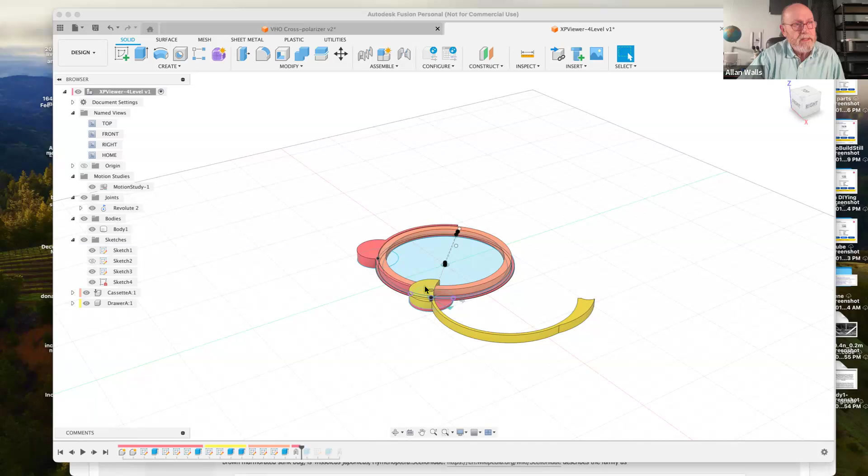This is the latest iteration of the 3D polarizing, cross-polarizing platform that I built. I've made many of these things now, but this is the one I think I'm going to go with. This is one level of four. There's also a lighting level below this and a cap on top, but this is the important part. What did I call this? The drawer. It's got a shell or a base and a drawer, and then a cassette that goes on the inside, and all the parts are different colors so you can see where the different components are.

This piece swings out, supposedly with the cassette attached, so that you can drop in your different polarizing films or your subject, and each cassette is different, but the structure is otherwise the same. When you drop this back in, you close this. This is a joint right here, and there's a window in the side of this piece, though you can't see it because for some reason it didn't transmit over, but there's a window that your fingertip can use to rotate the cassette.

Now I've made a couple of these in different ways, and they all got messed up trying to copy this and make new layers that could be edited independently, and that's what I'm asking Larry about today. Though if it's not part of what he wants to talk about, we'll do this offline. But I'm trying to figure out how to make copies of this that are independent. There's an instruction you can give it, which is paste as new, but it doesn't show up when I copy the level. It doesn't show up as an option to paste it. So that's one of the things I want to pick Larry's brain on.

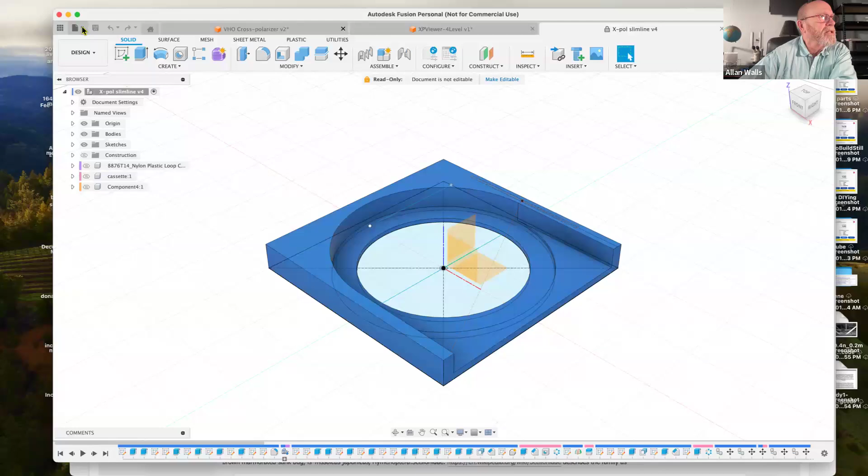Now, what was it called? The cross polarizer. See, I've got quite a few of them. I think I called it the XPL. No, this was the one. Nope. Oh well, if you don't remember what you called the thing, it's hard to find it. I kept changing the name because I ran out of things to call it, I have so many of them. Oh, I'll look at the date. Good idea, there it is. Oh no, that's the one I'm working on now. I'm very good at this, aren't I? It's 7/16, nope, wrong year. Can't believe I've been doing this more than a year. VHO. There.

So this is what, with all the components in different colors, this is what the stack would look like with all four drawers, four chassis, and four cassettes. But while I could get all of these like this, I couldn't operate the joints independently, and I couldn't edit the cassettes independently. I edit one and it edits all of them. So that's what I wanted to bring up if we get a chance today. But just as an update, that's where I am. This looks more complicated than it is, but...

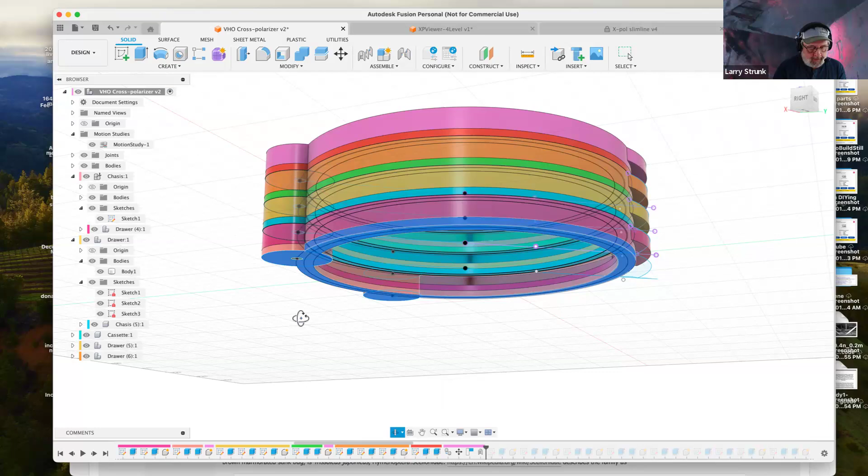But after I say this, the thing sits like an alarm clock on these two cylinders, and then it has 4 little handles for each of the doors. Larry, I was just filling time, showing folks what I'm messed up with right now, and I'll turn it over to you, Mr. Tangent.

Can you email me that file? Yeah, I just messaged it to you, but I'll email it. I'm not able to download it. Okay, this is not the one that I sent you. The one I sent you is the one I'm actually working on now, which is simplified to just one level so it wouldn't be as confusing. I'll show it to you, then send it to you.

Hang on, there's probably a way you can list these in order, isn't there? Is this the one I'm showing now? No, that's the one I've got now. It's, there it is. This is the one I'm currently working on. It's just one level, and the problem is how do you copy it with the working joint so you can edit it. All three components are the device so far. I will email this to you, and I will stop sharing and turn it over to your good hands, sir.

Sorry, I had a bit of a it was our park picnic today, so I had to get my lunch, and it took a little longer than I planned.

Windowed projector in preview, it's pretty fuzzy. Is it? Yeah, pretty low. Does that help? Yep, that helped a lot. Now I got to figure out why you can see Lightroom.

It's actually not Lightroom, it's showing Fast Raw Viewer. Is that an add-on, a Lightroom add-on? Hang on a second, no, that's a different app. I was going to show that when I talked about my... are you in there, OBS? There we go, there we go. Jeez, oh Pete's, man. Has anybody used Fast Raw Viewer? I have not. It's a little $30 program. That's why I haven't used it.

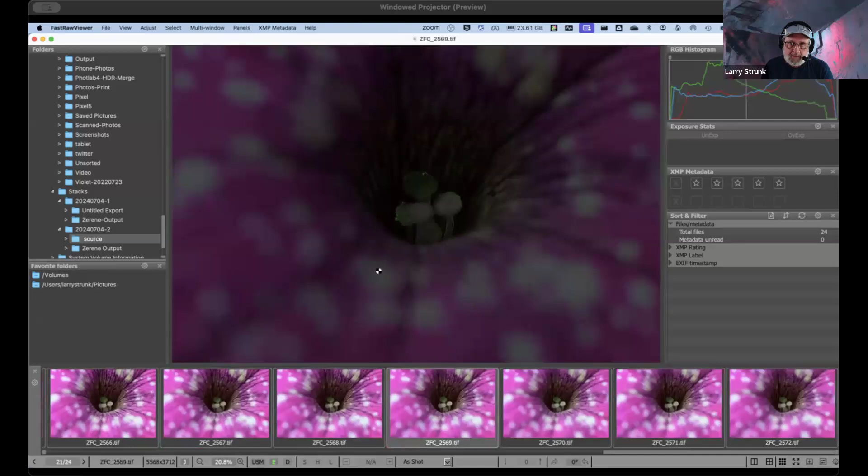The reason I use it is because it's a fast file viewer, but you can do this thing where, can you see the green highlighting in here? No, it went dark. Right, and there's little green highlights, like almost like focus peaking. And you can go... oh, I see it. Now yeah, yeah, now I see it. And that's how fast it is, even with a raw file. So if I'm wanting to do a stack that's only part of an image, I can use this to find my stacking zone and decide which images to stack. You can do other cool stuff with it, but it's kind of my main culling app. What's it called? Fast Raw Viewer.

All right, let's get Fusion up. We're on a Mac today, Larry. Come on. I was hitting the Windows key and nothing was working.

So my plan, since I figured nobody was going to get their homework done with Allan being gone for 2 weeks, was to do a little lesson on how to draw things from images that you find.

Larry, could I ask on the homework? I did scan my camera body. My plan was to scan each piece rather than try and support it all in one go. When I scanned the camera body, the depth of field wasn't great - whichever side was sitting on the glass. Do I have to play a bit more in the scanning settings to get something with depth? Because I take it we need the depth of the image.

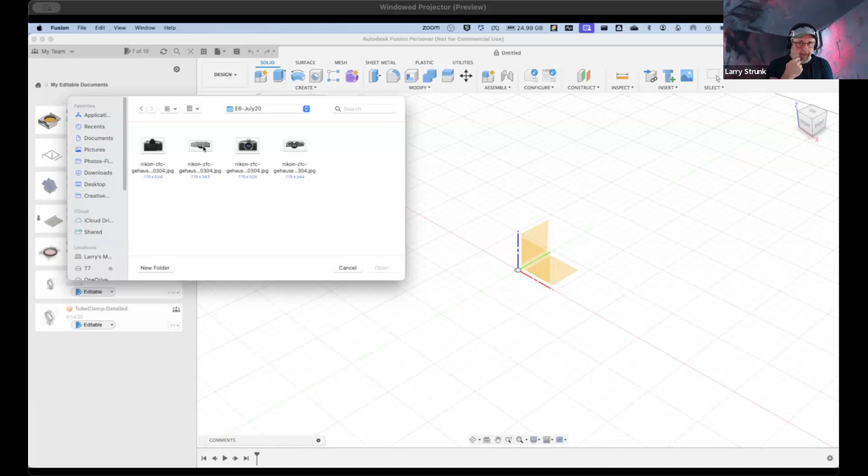So I'm going to insert a canvas. And I have them here. I don't remember which one is which - oh, I can change icons. Decal is just a zero mass shell, or it's just the outside, it's hollow. When you choose decal instead of canvas, is that just the shell? It's not even a shell, it's almost like paint. It would cover up a material. Right, it's a sticker. I mean, it's a decal. It's a sticker. Got it.

So I have, maybe I can show you the pictures. Documents. So I was able to find, because of all the review sites that are out there, these JPEGs of my macro camera. Not the macro camera I would have chosen, but it's mirrorless, and macro with mirrorless is way better than with a DSLR.

Can I ask your opinion on what you just said? Sure, what's the difference? Partially it's because live view is very clunky, at least on my D500. It sounds like it's going to fall apart every time you take a picture - it goes ka-chunk, ka-chunk, ka-chunk, and it's just not very good. If you have a Canon or some other DSLR, the live view might work better. But live view just lets you use mirror lockup - I don't know if you can with live view, Allan might know. The situation for me was, until I had a mirrorless camera, I couldn't understand what all the fuss was about. The mirrored camera worked fine using mirror lockup.

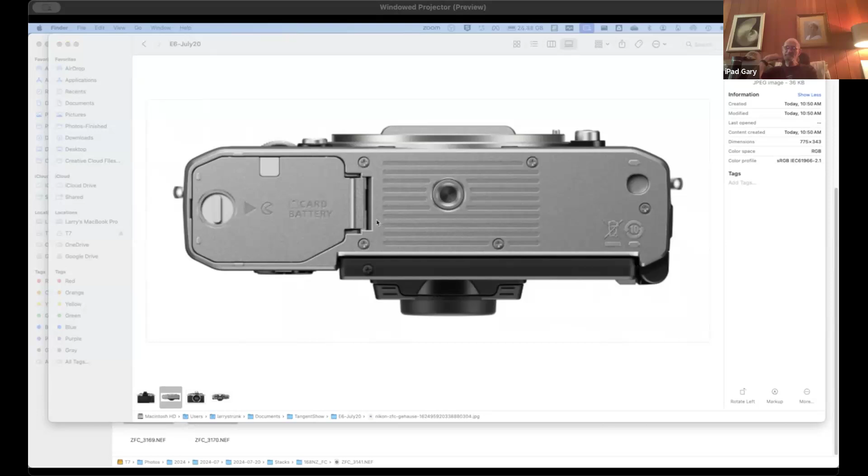Sorry, Larry. Larry, glad you answered. Are we losing him? Yeah, Larry appears to be frozen. But I love these pictures of his camera. That is, yeah. I would love to find where he got those from.

You back, Larry? Yep, I'm back. Can you hear me? Yep. Okay, so I started with this one because everything you reference on your camera and your cage is going to be based on the tripod socket, right? Forgot to hit a button.

So the first thing we want to do, you'll see in the tree, we have canvases. I'm going to go ahead and edit the canvas, and the nice thing about when you're doing what I call volumetric models, you don't have to be exact, right? Larry, if you're close, your map on the top right references this as the top. Is that just because it's the first picture you chose? Can you check? Can that be changed?

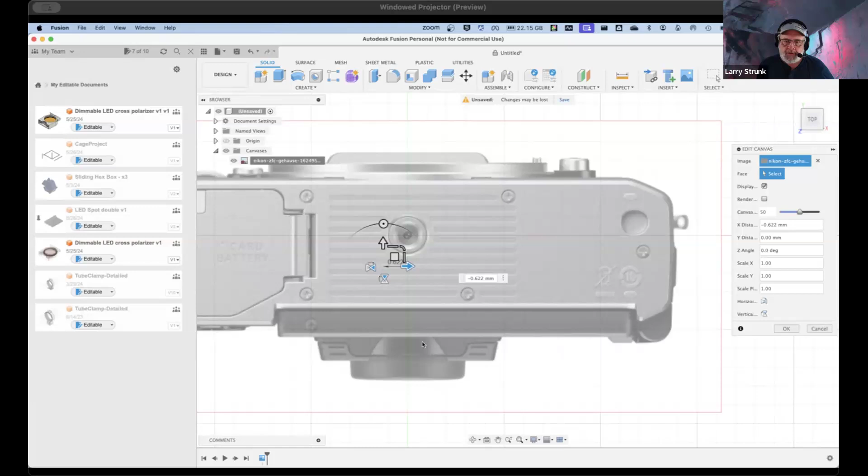So when you put a canvas in, it's see-through. It works on both sides. Okay, got it. I chose the top plane. It does flip, so the viewfinder, which is on the bottom here when I'm looking at the top, and if I'm looking at the back, now the viewfinder's on the top of the screen. Understood.

So now that I've got it where I want, I could either measure a known object that I can easily click inside this image, or I can simply do some more digging on the internet, and I can see that it's 135 millimeters from the edge of the lug to the edge of the lug, probably.

And that's probably going to be close enough. So I right click on the image. Whoops, I moved it, so I gotta click OK. I right click on my canvas, I click calibrate. I'm just gonna eyeball the edge of that strap lug and the edge of that strap lug.

Does the calibration become more accurate with the more data points you enter, or you just stick with one? No, you just have one measurement. But you can see this is on an angle, so if you have that kind of situation, I'm just gonna hit escape. It would be logical to take the biggest measurements, and then that would mean the accuracy of the other ones would be better. Correct. Very good point, Graham.

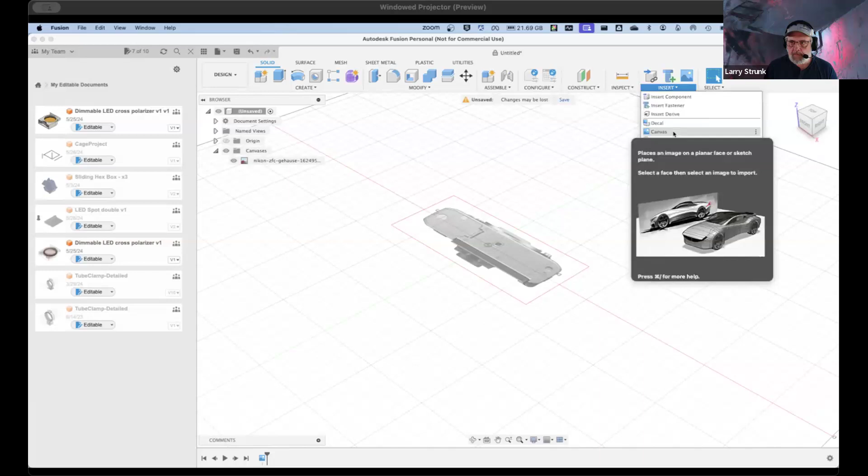And now I'm going to insert another one. And let's do... so what is important here is that you have your plane of where you want to sketch be roughly where you want it to be. So before I insert this next canvas, I'm gonna go into my top view. I could go into, it doesn't really matter where the view is, but I'm going to construct an offset plane. And I'm going to put it right to there.

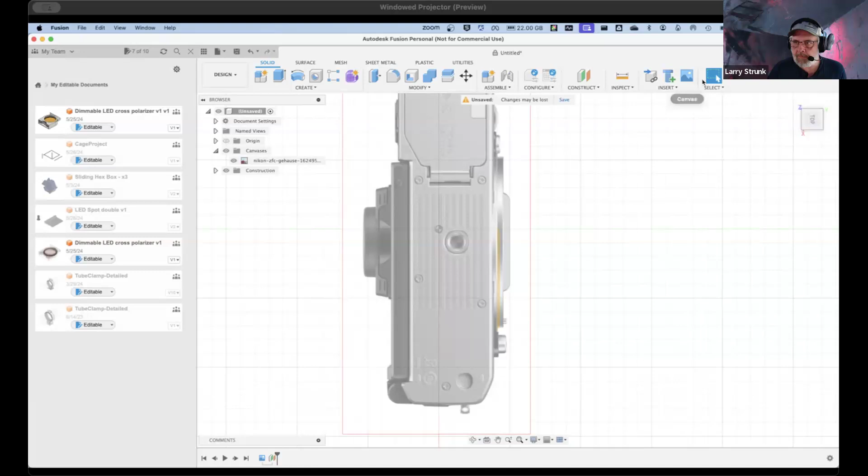Go back to my isometric view. What's the purpose of the offset plane? That's where I'm going to put my next canvas, which is going to be the front of the camera.

Why would you not just use the same origin point? Because I'm going to want to extrude one of these sketches, and I could extrude it two directions, I guess. Six of one, half dozen of the other.

So do you want a separate image for every face or surface that has a unique feature on it? I'm just gonna do two for this one. Every feature that you would want to model, yes. I'm really just gonna go for a cube, a rectangular cuboid, just whatever shape. But I'm gonna make sure I have the lens as good as I can, and the tripod socket - those are the key dimensions, right?

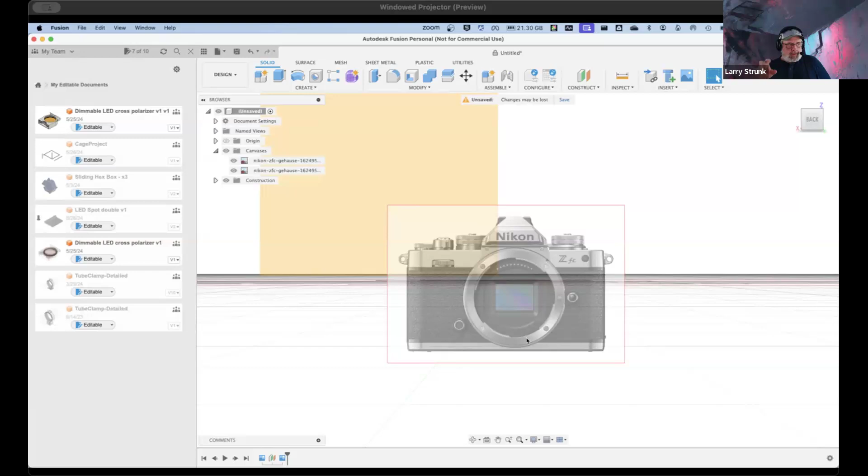So I need to edit this one. I can rename this, which is always a good idea to rename things.

This one's kind of tricky because you gotta adjust your view until the plane disappears, and then you can slide it up there. Is there no sort of referencing that first image to be able to punch numbers in? Nope, there's not. It's kind of a fiddly thing, but once you get it done, it's kind of nice.

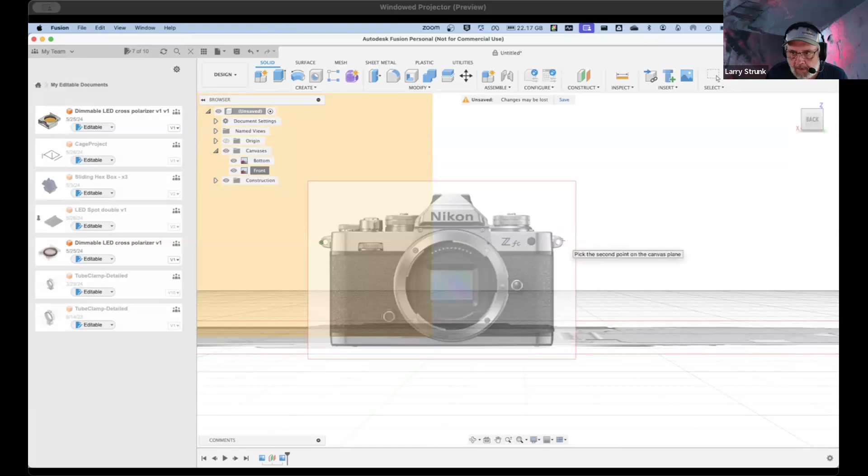So we can do that same calibrate now from here. Is it important to you to use the same dimension here? I could have, if I measured the outside diameter of the lens mount, I could have used that. I'm just doing that because I have the number up on my other screen. So I put in 135.

And now I probably, or I may anyways, have to - oh, actually looks like it lines up pretty good. I was going to say that looks close. Thank you, whoever took those photos. That's pretty amazing.

So then go ahead. I was going to say they obviously bothered when they took them, didn't they? Yeah.

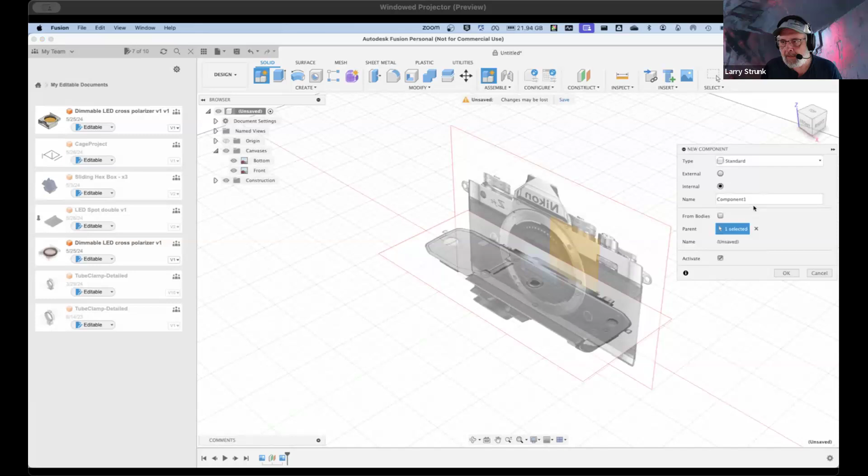And then it's just a matter of - I'm going to come in and create a new component, and we're going to call this ZFC volume. I'm naming it with volume so I know not to measure anything off it, because it's not completely accurate.

And then we're going to create a sketch, and we're going to do that same plane. It's grayed out like that because I did the canvases outside of the component for some reason, because I forgot to create the component.

But then it's just a matter of - and you can get as fancy as you want with this. These are just lines in sketch.

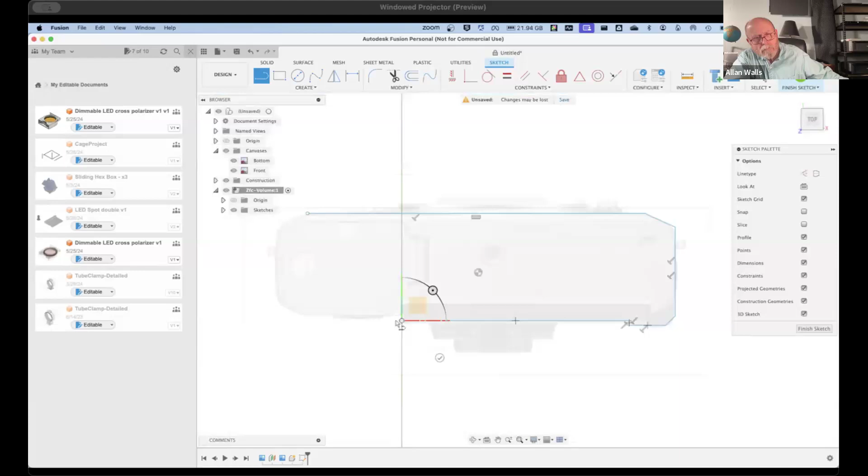And again, the idea isn't to be completely accurate, because it's not going to print. We're not printing it, are we, Larry? Right, exactly - ultimately you just want sort of a length and width to fit the rest of what is going to be printed around it. You're even printing something to hold this thing - you're not going to build a case for this camera. Nope, you just want something that shows the space that it takes up inside your rig.

So I'm going to finish that sketch. It was just a placeholder. I was going to say we're not going to fit the rig to a thousandth of an inch or something, are we? Right, exactly.

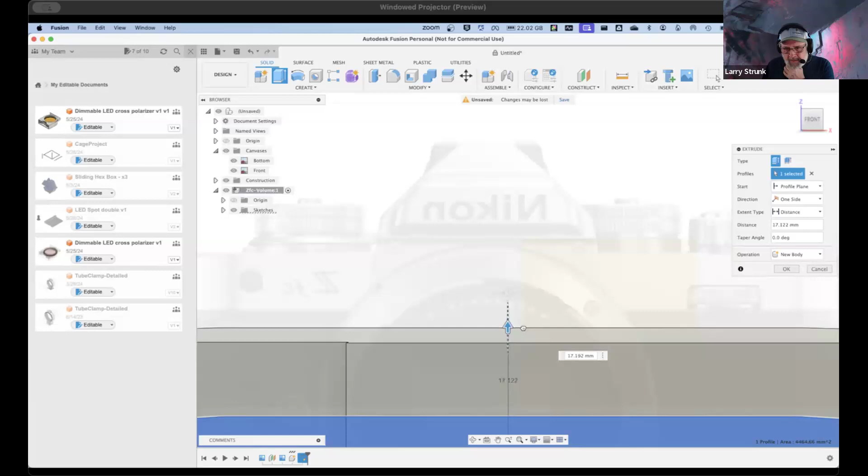So I'm going to go to front, and maybe I'm going to get fancy and do the mirror - but that looks complicated to me, so I'm not really gonna do the prism. I'm just gonna do enough to make it look decent.

And this is where, you know, if I wanted to model all of those dials - see what happened there? I didn't, for some reason - when I calibrated, my vertical move got off.

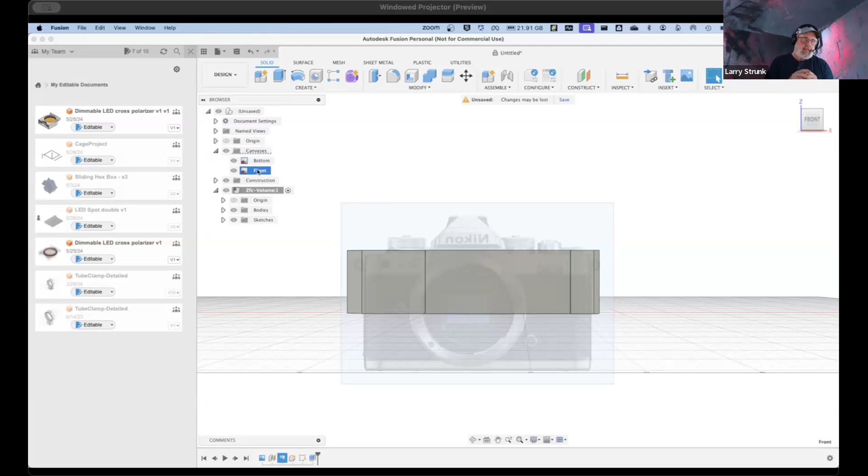Is it on the top reference plane of the camera now? No, what happened was when I scaled it, when I calibrated the canvas, it's like a scaling of the image about wherever I clicked for the calibration measurement. So that distance was X number of millimeters from the origin, and it referenced that from the origin and scaled it, right? So pretty easy - I can just edit the canvas, eyeball it again.

Why would you not use the optical axis as your key feature for calibrating? Well, I have two features for calibrating. The optical axis wouldn't be a calibration, but I definitely want my optical axis to be relatively accurate. Again, we don't need millimeter accuracy. We want the reference points to be where you're going to mount things, like the tripod socket and a plate, and you want the lens, the circle of that lens mount, so you can model a lens. Got it.

So I'm going to press and pull this to get it where I want it. I'm just going to go up to there.

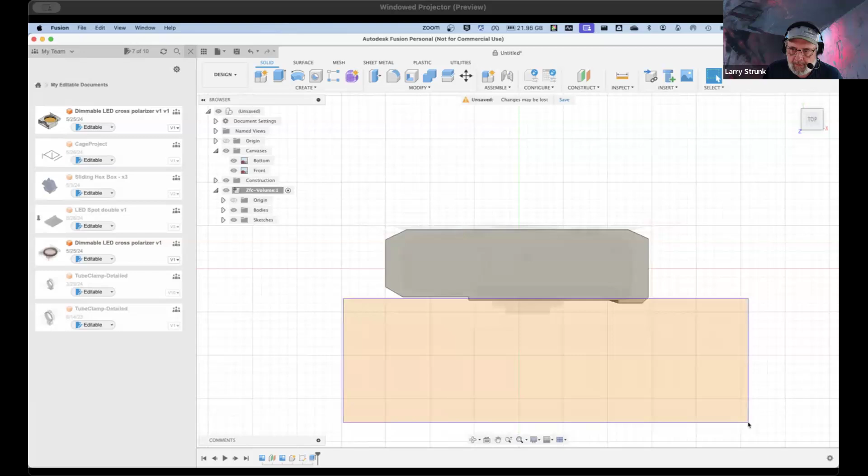This is where you've got to be a little careful. See what's going on here? My viewfinder and my bottom are in this area, and my lens mount is up here. But this is asymmetric, right? It's not centered. It looks like the body's backwards. Isn't the bit on the right where your left hand goes?

No, this is the right side looking at the viewfinder. Oh, okay, alright. Then I am backwards, okay. This really should be... No, we're not looking through the back of the front face image, are we? Because the Nikon would read properly if that was the case, wouldn't it? Right, Larry, when you picked the second plane for the second image, I think you had the wrong plane, didn't you?

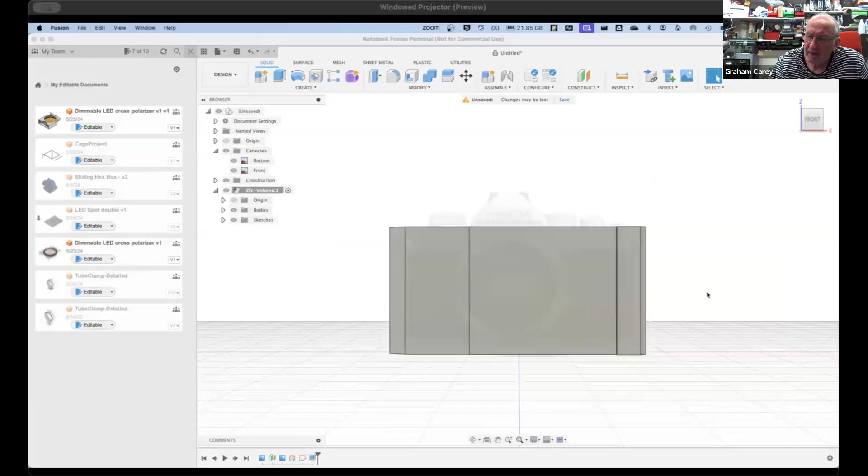I may have. Let me fix it this way. I'm gonna edit the canvas and horizontally flip it. Now it's correct. No, it's not. Jeez. That's right, easy to get lost when you're doing this.

So what's going on is the canvas, we were looking at it like this, right? Did it say Nikon correctly before, or was it backwards? It was backwards before, but it's right now. It's right now, yeah.

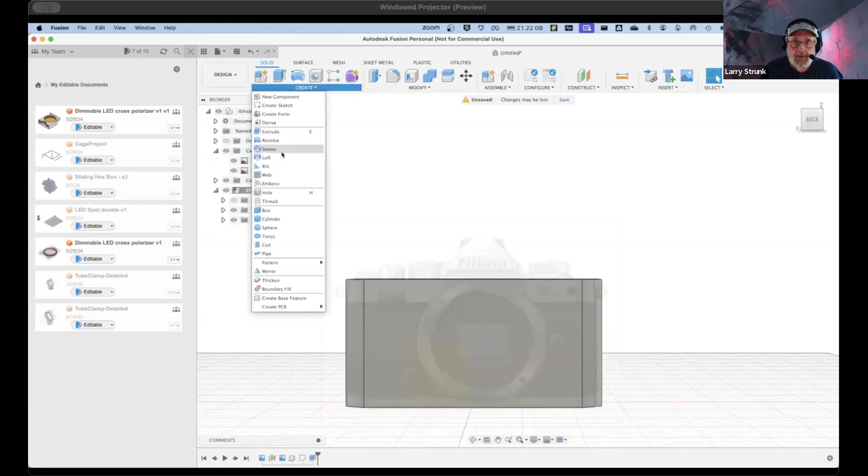So I can create a new sketch, and I'm just going to start on the front of this object, because again I'm not trying to be perfect with it. Not sure why it was doing that. There's a tip for you: if a tool is acting funny, just get out of the command. Now in this one, I'm gonna... we'll go there. It's gonna be close enough for what I want to do.

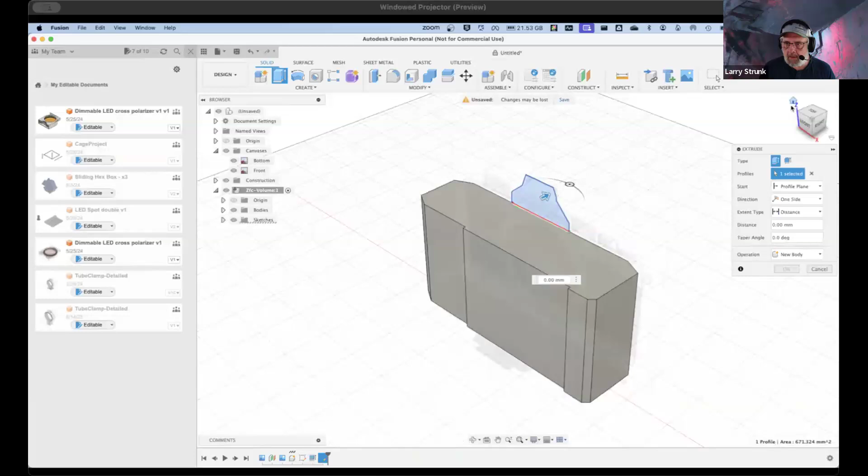We'll finish the sketch, extrude it, and we're going to come this way. I do want to get that it comes out. So now we've got that. And then the trick with approximating circles is...

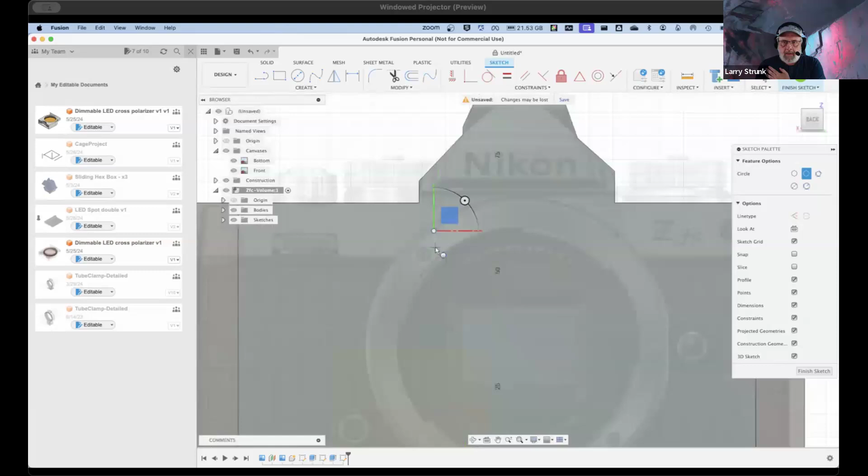We're going to create a new sketch on that front face again. I'm going to do a circle, and I'm going to use a 3-point circle. Whenever you're digitizing an image, you have to kind of play with how close you're zoomed in. If I zoom in too close, it starts getting fuzzy. So you're gonna kind of get it right to the spot where you're confident you're selecting on a line, and then make sure you're selecting the same reference circle.

And that's respecting the resolution of the image you've picked up, isn't it, Larry? Correct, yeah, and it's totally dependent on that resolution. So that looks pretty good, and you can kind of test.

What the heck? Oh. Let's turn our body off. You can check that. Why? Oh, now I can select it. Jeez.

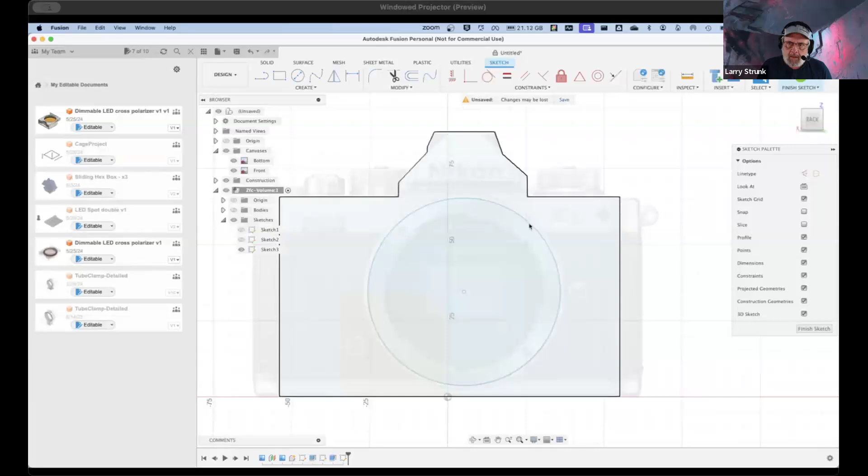I don't understand why I can't offset that. I think it's because your sketch is on a different plane, your sketch is on the plane of the back of the prism. No, my sketch should be... let's bring the body back on. It's in the right spot. Yeah, it is. Sorry. That's all right. So we can do that another way.

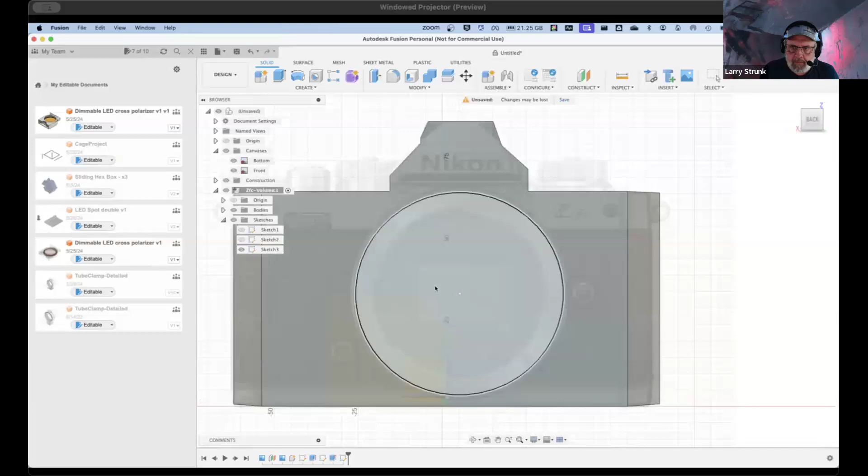What I was going to say is you could offset the circle, but for some reason I can't seem to offset the circle. Could you project that circle up onto wherever you are now? You could. Boy, it's not snapping or anything. Now I can. So create a circle. Oh, jeez.

So instead of doing an offset, I'll just draw another circle and use the center of the circle I already have. Just by rubber banding it like this, I can see whether or not my center is good. Just by eyeballing it, looks like I nailed it, right? See, I can see the edge.

And then we can extrude. Turn the body off. Why?

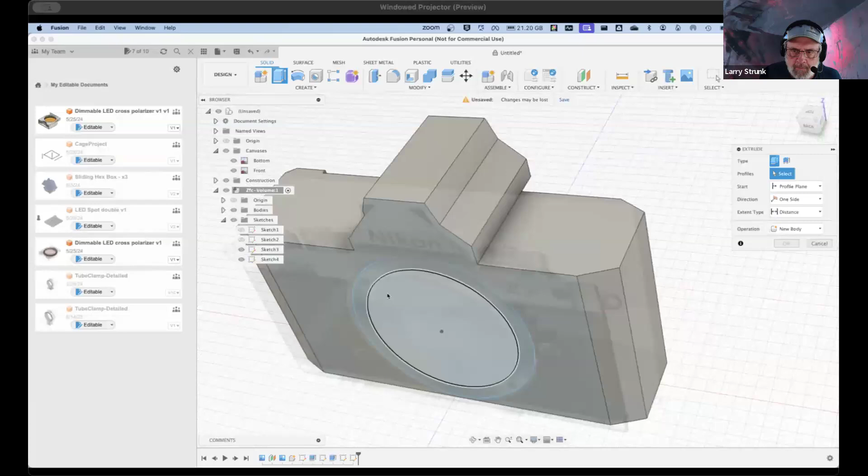My Fusion is acting really strange. Is it because you're pushing it with what we're doing? I don't think so. I think it's because I have an update that I'm supposed to be installing. Oh yeah, so it's sulking.

Maybe. So the other thing I wanted to show was, you know, I have all one body right now, and that may or may not be what I want. You can always go back and edit the feature and change it to new body.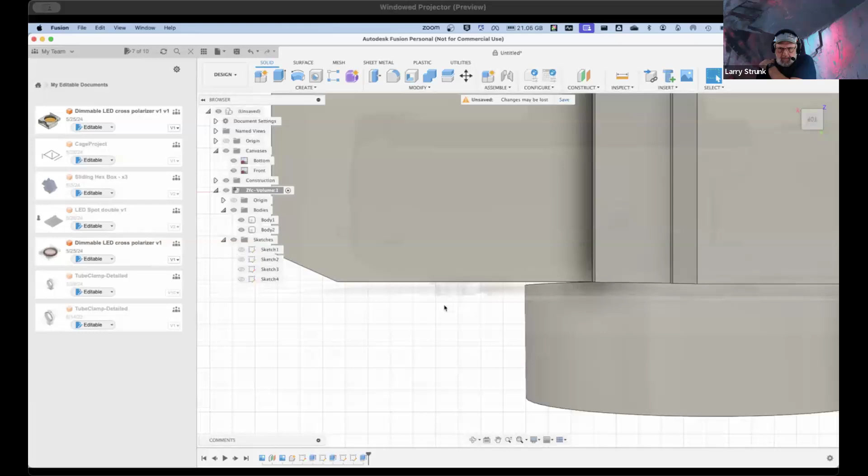Now I've got two bodies. But for the purposes of this drawing, I actually want two bodies, modify all that, as one component. Right, all one component, but two bodies. I'm going to push-pull this in, and I'm going to use...

You can see the flange right there. Right about there. Oh, there's something wrong there. Yep, that explains it. See that? It's at an angle. Sure as heck is. Look at that.

How did that happen? I'll do the tube lens. But then would you model the different lenses so you could turn them on and off depending on how you're set up? Yes, I would. I would put the flange out there so it's about right, but let's figure out what happened.

You used the front of the thing as a sketch plane and it's not parallel to your axis. Bonus, you get a gold star. Because it was just a freehand sketch, right? Yep. Is it a tilt-shift lens?

Yeah, that's what it is. Or maybe one of those Holgas, where the lens flange wasn't necessarily perpendicular to the film plane.

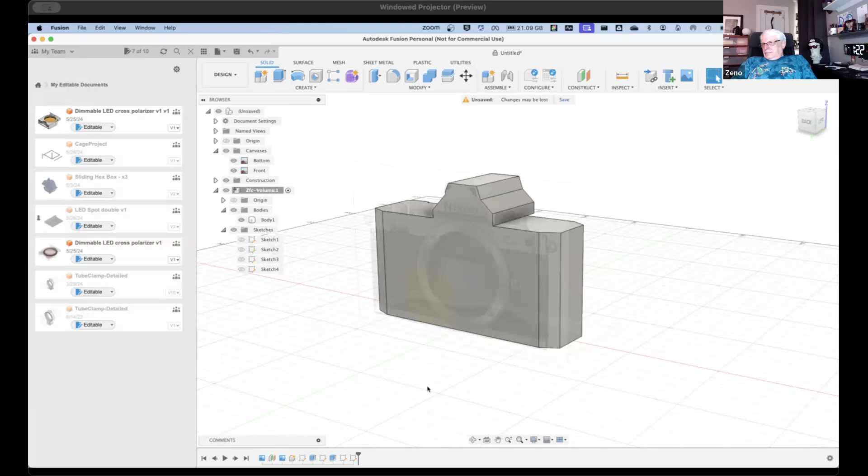So, create an offset plane, correct? Do an offset plane, and I'll just pick a vertex. First I have to select the plane. Actually, I could have used that one.

Where is it? Construction. You want to go to your coordinate planes, not anything off the sketch. Right, this plane right here - if I turn off the canvases and turn on the origin, I already have an offset plane where I want it. It's that one I just created. That's why I did it that way, Alan, instead of at the origin, because I knew I'd need it later.

Do you believe me? Yes.

Trying to quietly eat my lunch. All right, isn't video conferencing useful?

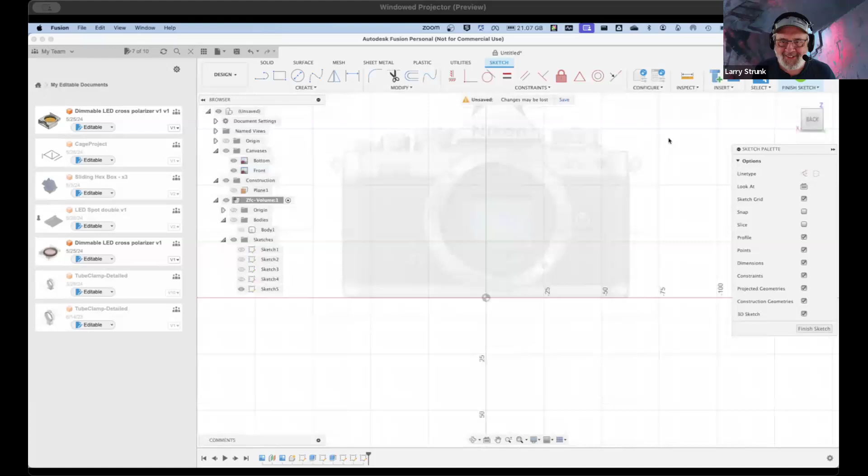All right, let's try this again. Get it right about there. We're going to create a circle. We're going to do a 3-point.

Bang, bang - will you guys eat some of this if I send some home? Bang.

There you go, looks like I can offset it now. Amazing when things are all in a plane, how well they work, huh? Finish sketch. Should have known something was wrong.

Oh, new body - it's giving me an error because I turned off all bodies. Let's go to top. Looks like your sketch plane is... am I still on?

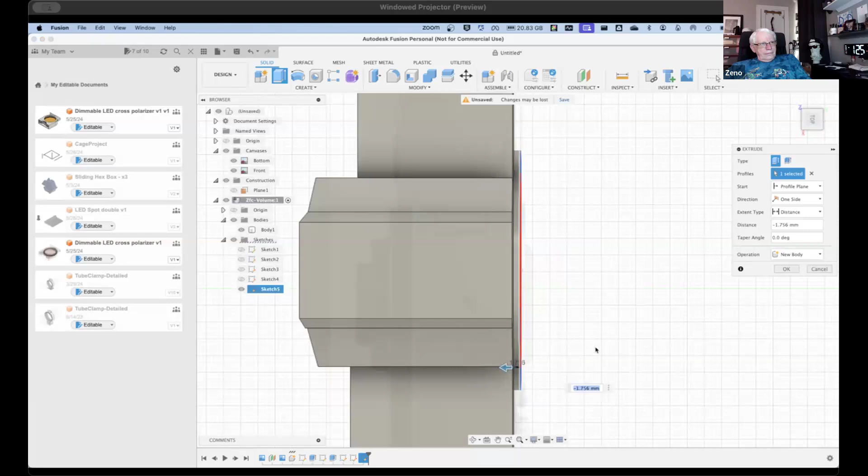Looks like that was a little bit off, so I'm not sure why that happened. But close enough for what we want, right?

We can now mount this on a plate. We can put it in our cage and we know how big it is. For the lenses, it'd probably be quicker just to measure them, as long as you don't try to put every step that's in there in them. Does that make sense?

Oh, there you guys are.

So that's the quick and dirty volumetric model.

The other nice thing about doing these, when you take off the pressure of getting it perfect, is you get a lot of experience. You just grab something, or a picture of something, and just do a model at this level, and you'll get better at working with construction planes, constraints, and doing sketches.

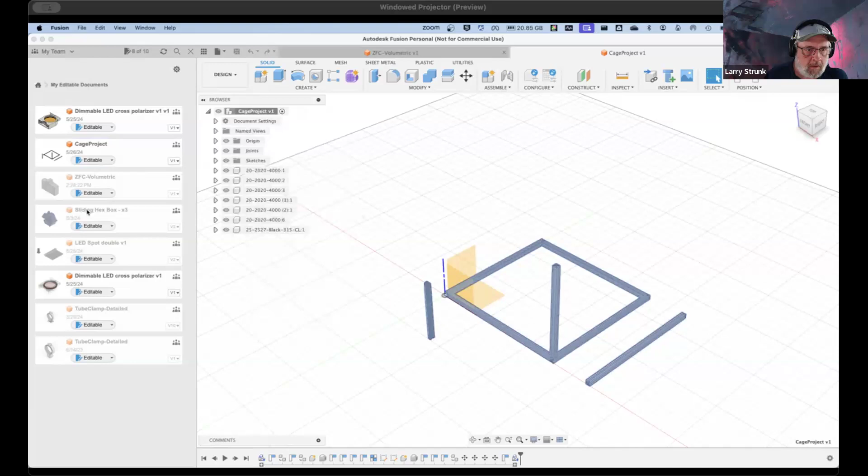Is there a way you can save these, Larry, as volumetric components for when you need to use them again? It'll just be a component. So if I save this as ZFC volumetric, and then I open my cage project, I can just bring it in.

Is the volumetric model also parametric and stored in the same place? It's a full Fusion 3D drawing. The only difference is that it's not precise. Okay.

Okay, but now I can put it in here and move it around to wherever I want to place it. Larry, should you have said it is precise, but not necessarily accurate? Sure, that makes sense. Yeah.

Okay. I have been known to get pedantic on those two words at times. I'm sure Jeff has too. Many times.

So that's the value of that. One, it's a nice low-pressure way to practice, and two, it's useful, right? Because now I can design things around this so it doesn't hit it, and I can get a feel for where it's at relative to what I'm doing.

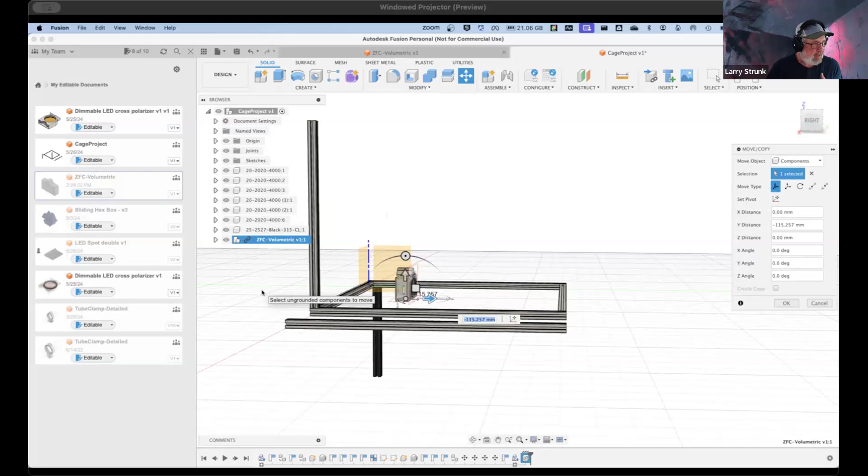And you know, if I have some sort of linkage, am I going to have room to get to my panel where my plugs are over here? So you can start visualizing that better instead of designing yourself into a hole where it's like, oh, I built this thing and now I don't have room to plug in my HDMI cable, right?

And you could do the same thing for the end of your HDMI cable, the stiff part, right? Not the whole cable, but the part that won't bend. And you build it big enough to have the clearance you need, and you smack it on the end there.

The other thing I wanted to show you guys today, just real quick - I was hoping it would happen automatically, but I'm just going to create a new sketch about what happens when you're sketching. I was getting it a little bit as I'm drawing this. You see how these angles are coming up, and if I let it, you see the perpendicular symbol showing up on that line. So what Fusion is doing is it's guessing at what you want, and it's adding those constraints.

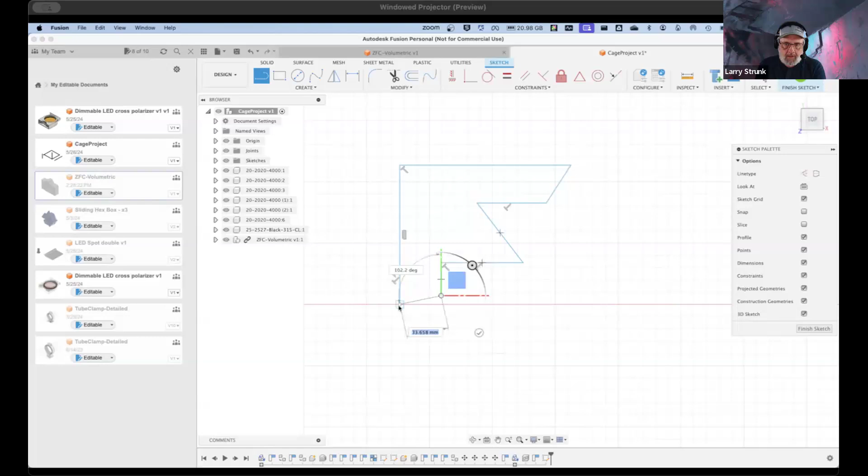But what if you didn't want it to be perpendicular? Say I don't want this one to be perpendicular - you can just come in here and delete it. And now I can move this, and it's no longer constrained.

The other thing is when you get constraints - Larry, if you go ahead and removed that constraint and there was another dependent constraint, would that have been removed as well? No, when you delete them, there's only one constraint that gets removed.

So if removing a constraint is prohibited because of another constraint that's already active - that shouldn't be the case, because that would make it an over-constrained model then. Right, it wouldn't let you add it unless you go over it.

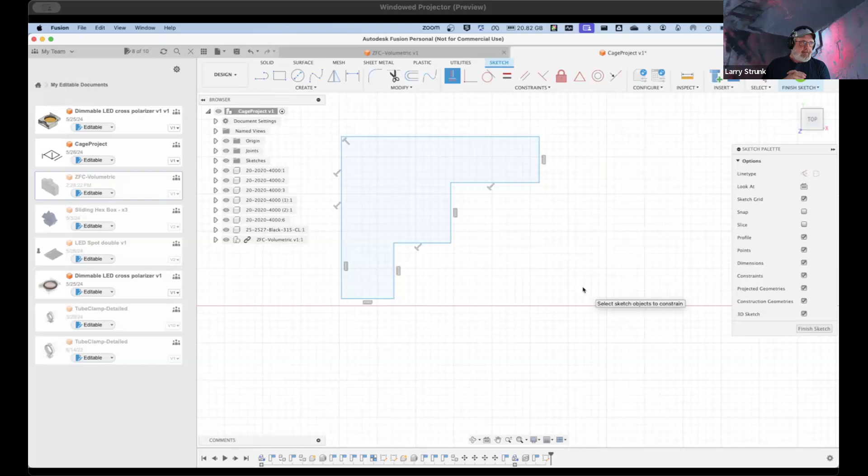So the other thing that happens, and when I first started it was hard to get used to - you know, I should have everything constrained, because when I come back and modify it, if it's not constrained, things will break horribly, which you've probably found already if you've modified a drawing that you didn't constrain. You'll get things popping off out of into nowhere.

So as you constrain your sketch, I'm going to put in an endpoint to the origin here. Whoops, not what I wanted. Command Z. I want to dimension it, and I'm going to dimension from here to the origin, and we'll call it 550. And you can see that only constrained this vertical line, right?

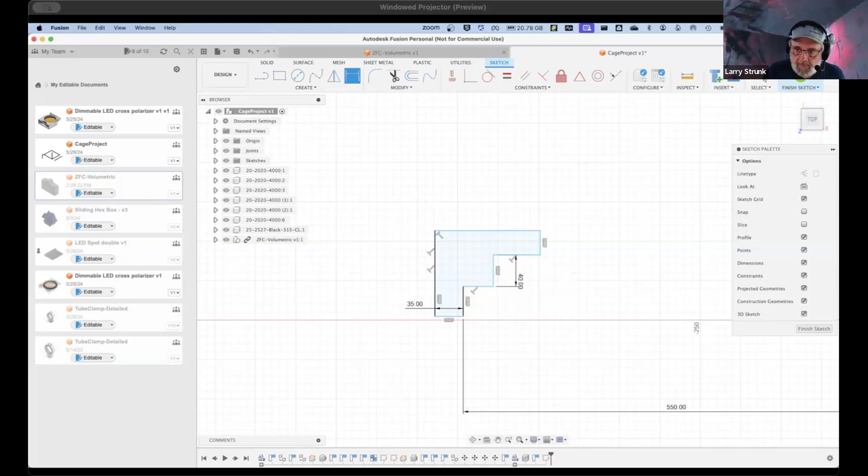And it's pretty easy to figure out that, well, okay, I should probably throw some dimensions on this. So we'll give this 35, look at this 40. I'm going to delete this, and maybe fill it in just to give us some things to play with. Oops.

It can sometimes be difficult to tell what isn't constrained and how do I fix it to get it constrained. And it's really not as hard as it may seem. And the way you do that - right, what's that? It's blue, it's not constrained. Right, but how do you get it constrained? Like I put a dimension on this line, why isn't it constrained? Because it can move left and right.

Before you get good at seeing that, all you have to do is put your mouse pointer on it and drag it. Okay, you're like, oh, so that's where my degrees of freedom are. Right, and then that tells you, oh okay, so if I put a...

Another dimension here, whoops, dimension, and we'll call it 50 - still not constrained, but now you can see that those are locked together. See how it changes as you add constraints. What you can get away with moving changes.

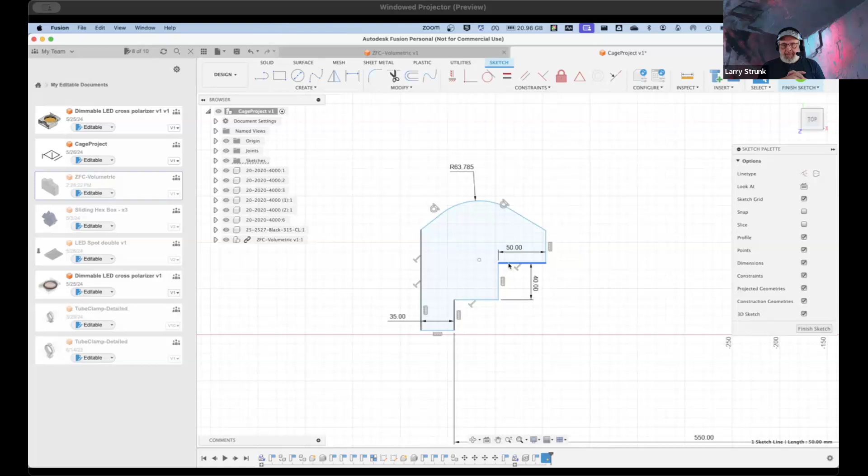And that tip probably saved me a ton of time trying to figure out constraints, because I was having a hard time - I would either be under constrained or over constrained. More over constrained than under typically, because I'd just try and constrain everything. So it's really handy to figure that out.

When do you add dimensions before constraints, or is it dependent on the model? It depends on the model. Quite often I'm putting dimensions in first, because when I'm drawing something, I'm dimensioning it. Other folks do not model that way - I see people just throwing together a rough outline that looks something like it and then going back and adding dimensions. That seems to be an extra step to me. No, that's the best way, the fastest way. Why is that?

Because you start with the shape and then you tell it what the shape is supposed to end up looking like. But why couldn't you do that in one step? My thought on that is it depends on...

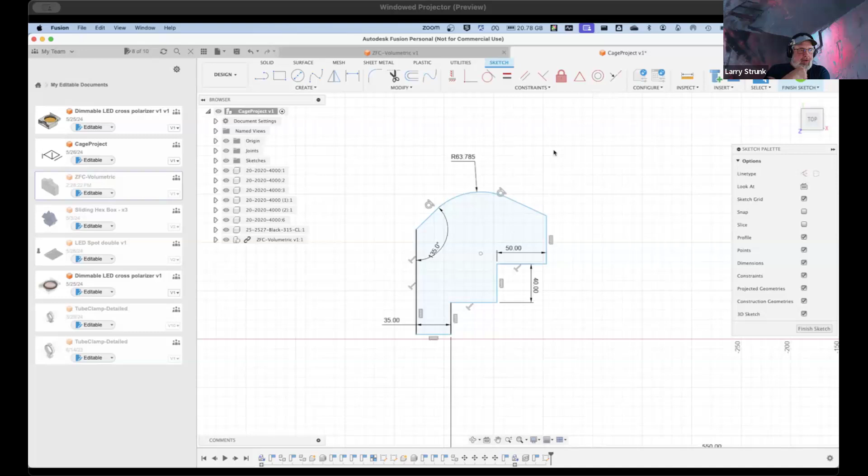Where your design is coming from. If you have the numbers, you know the critical dimensions, then I think it's quicker to do it as you draw it. If you're starting from a more conceptual place, then it makes perfect sense - you just know the shape you want and the relationships. The nice thing is you can do it either way.

My workflow is to draw it on a piece of quad ruled paper before I open Fusion, so I know what the key dimensions are going to be. You'll probably find as you get better with Fusion that your detail in your sketch on paper will be less and less.

But if you had the front of your camera, you could do a rough sketch of that, then dimension it to make it accurate. So if you were starting again, just doing the front of it, you could do a rough drawing first, knowing roughly what it looks like, and then dimension it after, which might be quicker than trying to actually dimension it as you draw it.

And you can refine this as needed. Say you wanted to design something to go in the cold shoe that's going to hold a diffuser - well, how do you know you're going to miss all your buttons on the top panel? Well, I'm going to have to model the top panel now. So that volumetric can get more accurate over time.

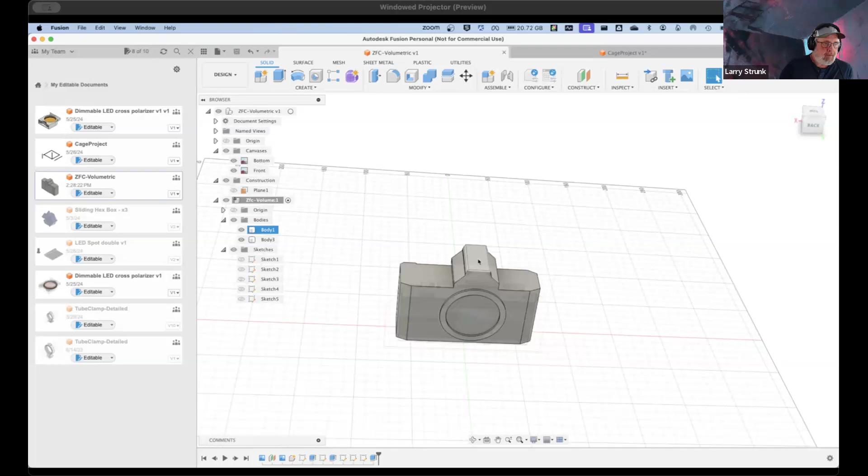Where it's worth time doing parameters is this guy - that's a class of products. That ahead of time, you are going to want one for a tube that's 43 millimeters and one that's... that was kind of in the initial design proposal for the clamp, we had different diameter tubes.

Well, that's a perfect case of doing it with parameters, because a tubular clamp that you can attach to an Arca plate is going to have a ton of different uses, in a ton of different sizes and widths and diameters and heights and all of that stuff. You made it into a parameter so that thing can change, like the thickness of the pad you're using.

I'm a little confused by the concept of when do you change a dimension into a parameter? Is a dimension not by definition also a parameter if you're in parametric modeling mode?

You don't define something to be a parameter, you just give it a dimension. So this is a case of fuzzy terminology. Parametric modeling means I'm modeling based on parameters, which is kind of loose. In a way, working in Fusion is parametric modeling because I can draw a cube and later change the dimensions of the cube, in a generic parametric design sense.

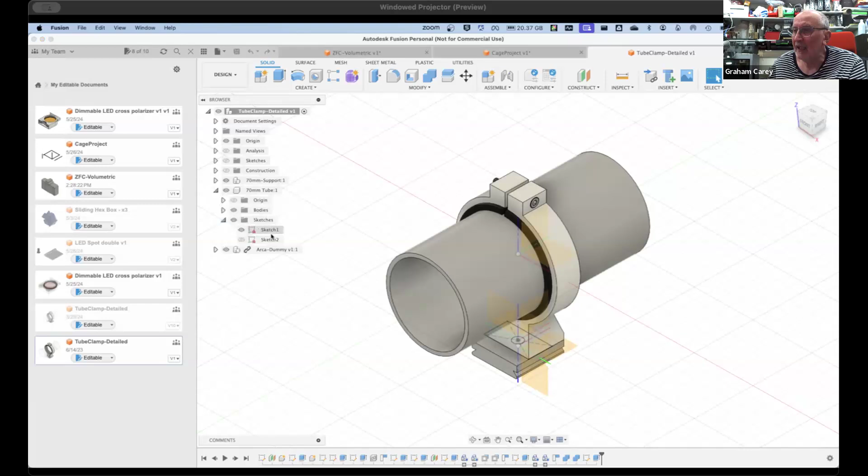Isn't it in relation to something else? So if you said something is half the diameter of something else, that's a user parameter, isn't it? You make one dimension relative to something else. Not necessarily - you can put a formula into a user defined parameter rather than a fixed number, so you can relate things.

If we look at the parameters in here, some of them are just numbers. The difference is if I draw a circle in this sketch and I type OD, I get that listed. That's a dimension that's been converted to a user parameter - it's a named thing.

You're fixing it in relation to the rest of the document - giving it a name that can be used elsewhere. Like Jeff was saying, it's a variable if you think of it in mathematical terms, or a constant. OD becomes an essentially numberless dimension that you can then change.

Pull up the parameter table again and point out the ones with formulas, like the clamp ID - that's a formula. That's the big advantage of the parameter. Once I have those names, instead of them being model parameters, which are things like extrude 4...

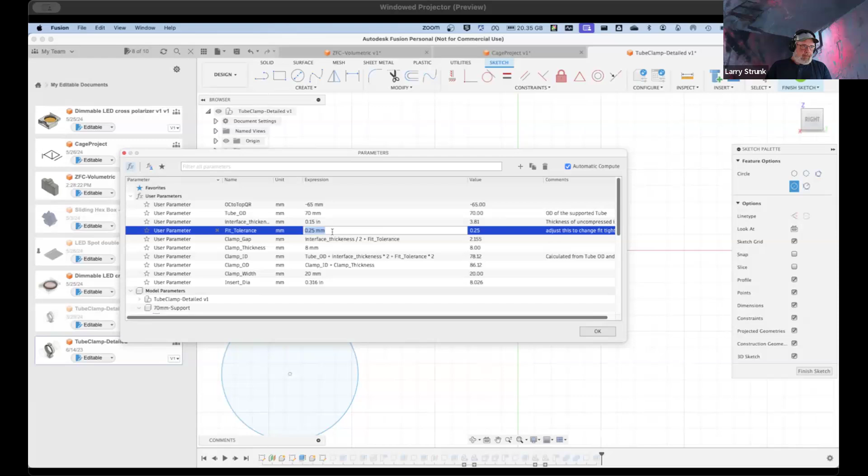The point is, your next parameter includes that fit tolerance. So when you change one thing, it cascades through the model and updates everything else because you have those relationships built in the expression as a formula, instead of manually drawing that gap. If you've got an internal diameter and an external diameter defined with dimensions in your drawing, but you didn't mention that the outside diameter is 1.25 times the inside diameter, numerically it still is.

You don't have to define the formula for the parameter to be recorded as only 1.25 times the internal diameter. No, that's not right. That depends on your constraints.

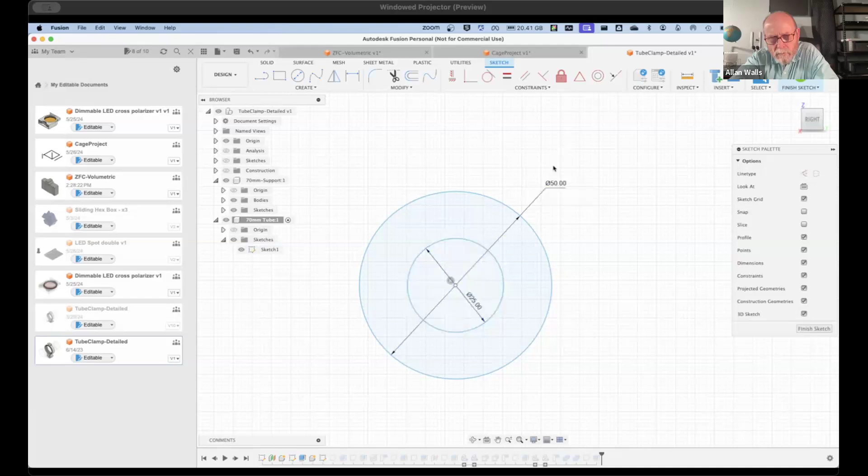Well, if it's appropriately constrained, do you have to write it as a formula, or does it not? The formula is just the relationship between the parts, and that's already baked into the fact that this is a parameter. So if I draw a circle here, that's 25, and this one's 50. So this dimension is twice this dimension.

If I then constrain these two, not by their dimensions... why did it do that? Because they have the same origin, so they're already concentric, fully constrained concentric. Is that what that double circle on the inside means? Yes.

So let me think of another way to do this. My point is that if you change the inside one to 50, the outside one would change to 100, because you've already constrained the drawing. It can't be anything else. I just changed it, and it didn't change the other one because there's no constraint between the two.

Now I could, without doing a named parameter, change that to a formula. I just click on this dimension, divide by 2, and it does the math - it's a function. Now if I change this to 60, the other one will change.

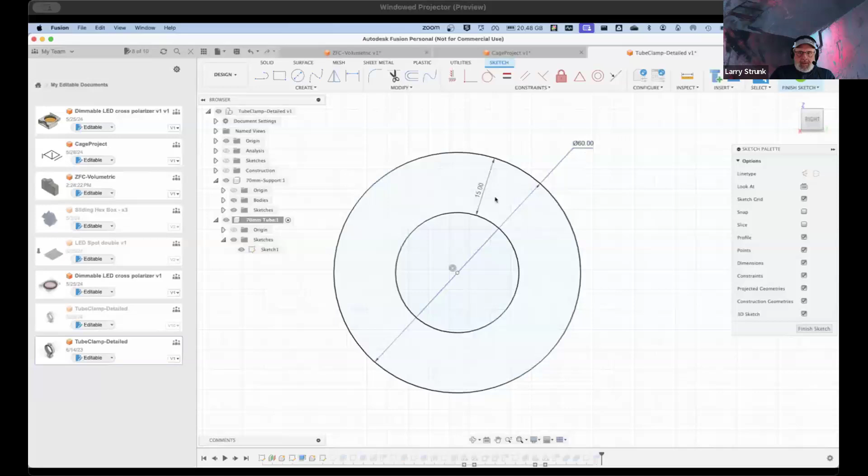So now, this one is half of this one because that's how we originally drew it. Now I've changed that to a thickness of 15. If I change this to 100, that's still 15.

If you're working in your shop and you have one printer, I wouldn't put a parameter in for that clearance. But if I'm going to publish a Fusion file, then I'm going to put it in there so other people can change it.

Your build tolerance that you have in your formulas - that's a perfect example of why you would parameterize it. Different materials or different processes, exactly. And that's why in my own shop I may not put them in there if I'm never going to share a part.

But the minute I want to publish it, I want to put those in there. So when you parameterize a dimension, you are expressing that particular dimension in terms of other constrained parts of the diagram.

Right, and I actually did that ahead of time. I took your sketch and figured out what I was going to call all those dimensions. I gave them all names, put the numbers into a formula table to describe them. Then when I was sketching, I would use the name instead of the dimension. That's really quite subtle, actually.

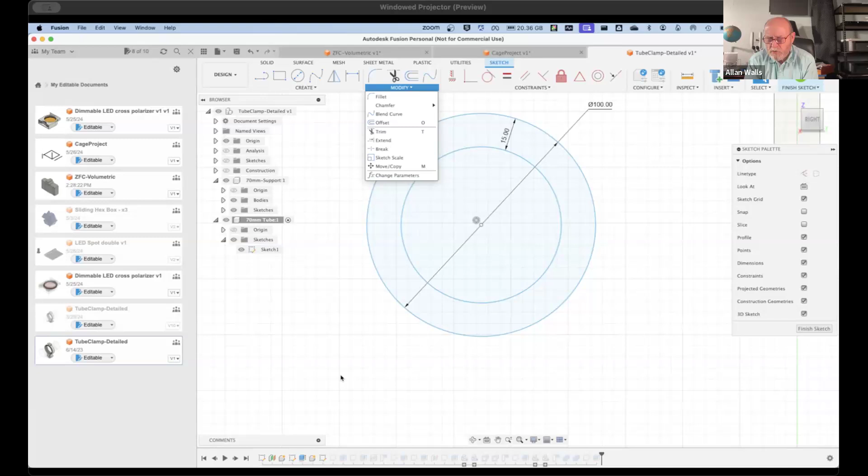Is this what screwed me up - the fact that different elements of that 3D cross-polarizing viewer were not properly parameterized? Is that why I could...

Probably not, but you could have saved some time if you had thought ahead and set - okay, my layer thicknesses are going to be, or each stack is going to be a certain height - and just set it once instead of typing it in later.

But I don't know that it screwed you up. I think probably quite often when you have multiple components, what messes you up is either you've got linked components that you don't want linked, or you've got sketches that drive your component that don't live in the component. Yeah, I've been very conscious of that. That's why the advice is when you start a Fusion drawing, create a component before you do anything else.

If you have a part, that one's tough to fix. If you have a repeating part - a part of an assembly made up of three components - and there are four of these assemblies in your device, do you create the three-component assembly as a unit first, or do you create the components as groups and then merge them together?

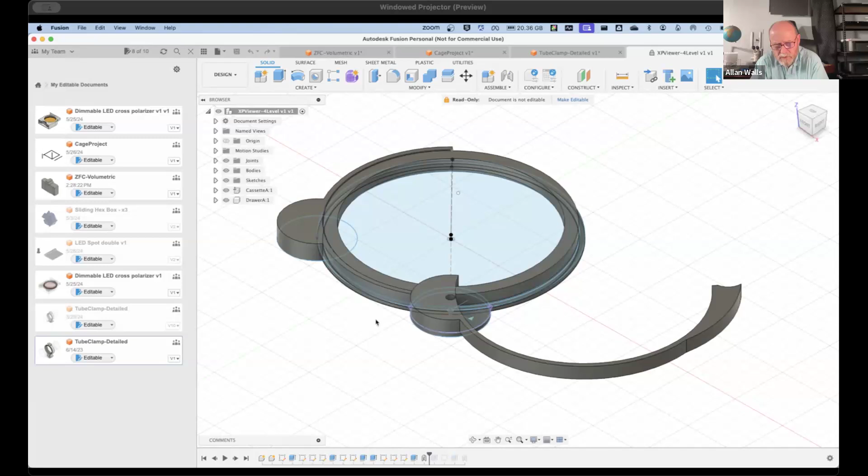So on this, Larry, there are three problems. One is I built the joint and I was able to show it working, and then I couldn't anymore. It's because the third component, which is the ring on the inside, is supposed to move out with the arm and also revolve around the central axis. But it can only do, as far as I can tell, one of those. Maybe I'm just rotating it in respect to the wrong component.

The ring, component number 3, called the cassette, is supposed to stay with the drawer, component number 2. So when the drawer swings out, the cassette is supposed to go with it. And what's up here? The chassis is the bit that doesn't move, part number 1, which isn't actually shown there.

Would it help to color code them? Yeah, they were color coded when I sent it over. For some reason, the first part, the chassis, isn't showing up. There it is. So the chassis holds the drawer, and the drawer holds the cassette.

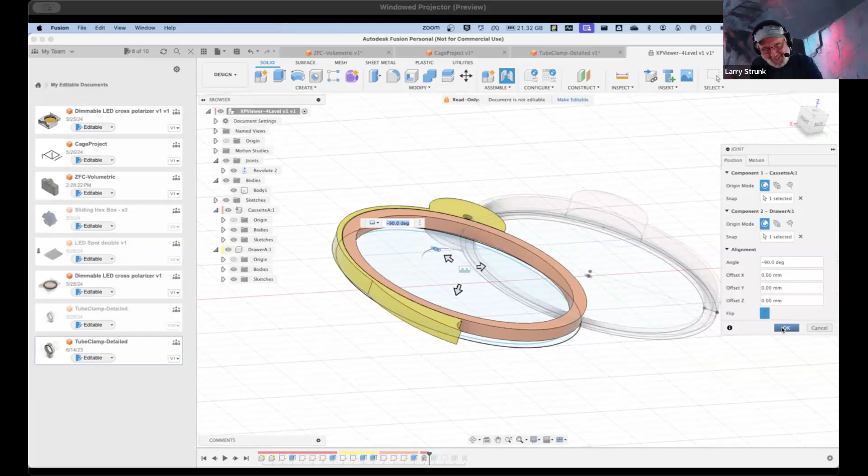So I made... hell, how did you do that? That was exactly what I've been trying to do for 3 days. Oops. That's the best part of training, is getting that response. He's a wizard.

I didn't see your hands move. How did you do that? And it was probably wrong, just so you know, I just wanted to see what it was going to do.

So I went into assemble, joint. I picked this circle and this circle. Does that automatically know it's a revolute joint around the center of the circle, or... No, right now it's rigid, okay? But you could make it revolute, and you're not going to really see anything because that orange thing doesn't have any features. Correct, correct. But that should show it.

Can you make the first joint work properly now? Um, it's revolute 2. Whoa, what happened here? Constrained to 90 degrees. I couldn't ever get it to work again once I...

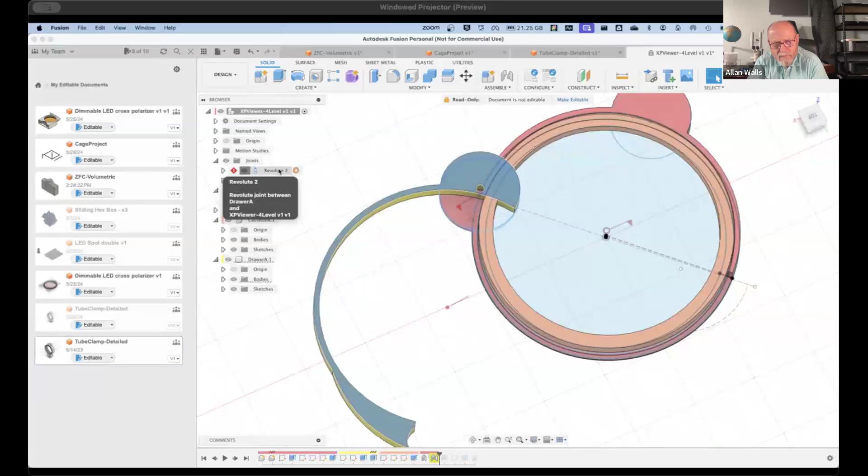Well, it's 85 degrees I made it to. At one point I was able to just grab it with my pointer and open it and close it. Your minimum and maximum are 85 degrees. Well, that minimum changed to 85 degrees. That was 0. There it is.

And then when I did a motion study, it would open up, but it would leave the ring behind. So that bit never moves.

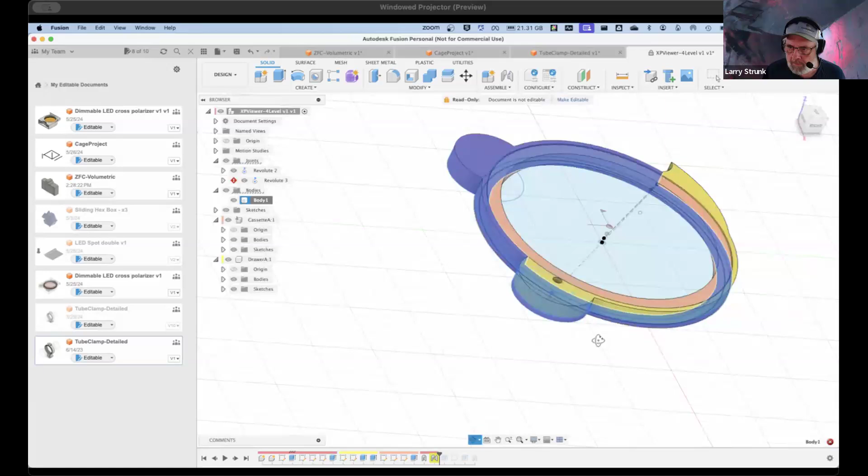I think because it's not a component, that's a problem. Well, it was the first component I made. So let's delete that. Somehow it became a body.

So the problem that this all started with was how to copy this with all of its joints intact. The other problem is you have the cassette grounded. Oh, I do. Yeah. How did I do that? I don't know, but there was a little anchor on the cassette.

The only thing now that's grounded. Let's recreate this joint. Joint here and here.

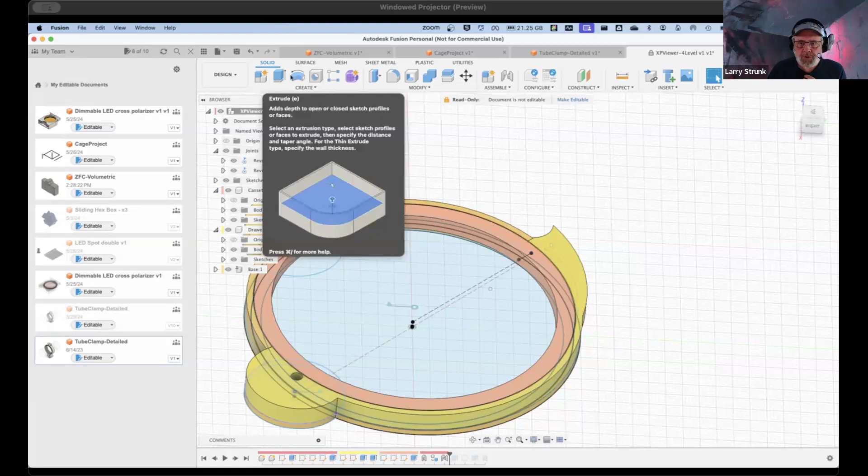If something's grounded, it cannot move in a joint. It's not going to move, it's frozen. Okay, so how do you connect the cassette to the drawer without grounding it?

Hang on just a second here. I just want to have something so we can see.

All right, so now we have the two joints. Select joints. Man, it's been a while since I've been in here.

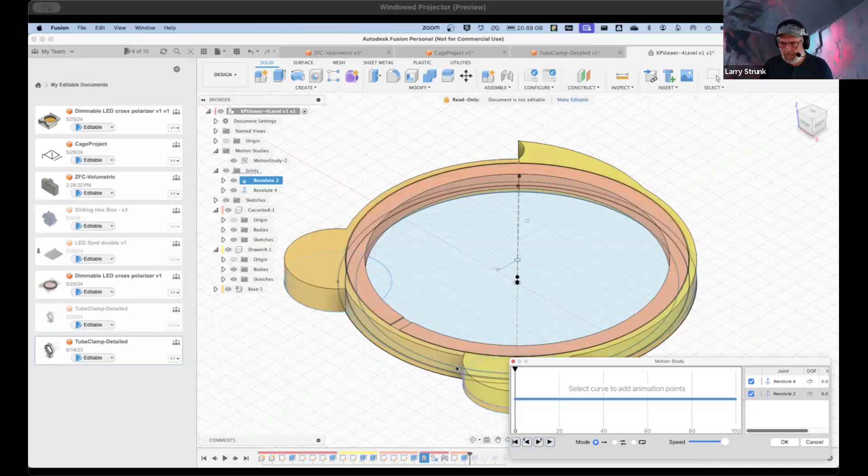Did I revolute it? Minus 85, yep, there we go. You changed the other number to minus 85. Yeah, I don't understand why it does that.

Unlock it. It won't leave them where I put them.

The first time I did it, it would swing out to 95 and then 85 and go back in. Oh, there's two components selected, that's why.

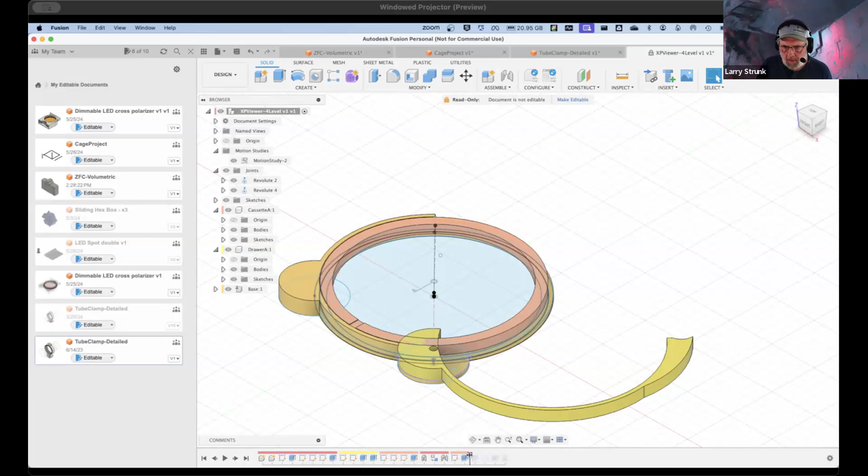All right. What the heck? Ah, there's my window that I had made earlier on that had disappeared.

That's so you can turn the cassette. Okay, we're gonna get rid of these.

Just to put it in your mind, there's a part of the cassette that I meant to have as part of the drawer. It's the same part. Can you move part of one sketch, part of one component, into another component and move it basically so it's connected to the second instead?

No, sketches no, but you can project from one sketch to another, from one component. But when you project, they're linked, so you'd have to unlink it.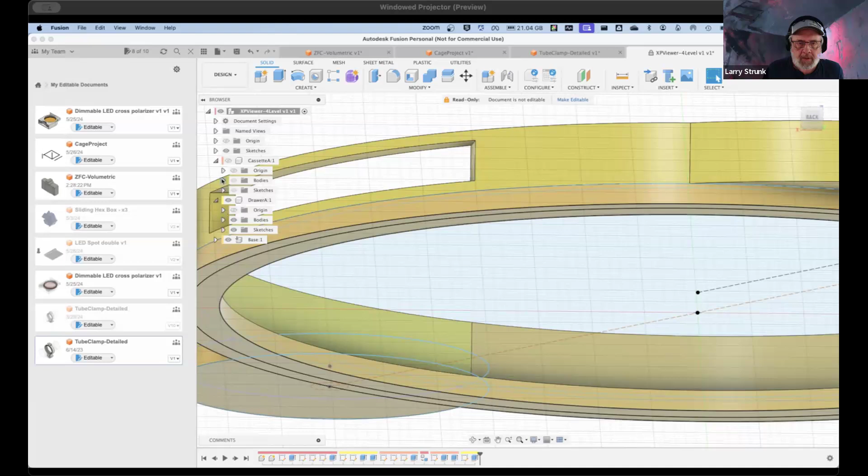That's why I keep having to start redrawing this. I meant for that bottom shelf to go with the drawer, not to stay with the chassis. The chassis has got plenty of rigidity, but the drawer doesn't.

Yep, this is the problem I ran into, was this. Well, I don't want to take up... oh, hang on, you've got something going on there.

That's actually the chassis that's doing the rotating. Is it? Yeah, the whole chassis is going around. And the two bits that are supposed to rotate are staying still.

Well, I would have to look into it, I'll play with it a little bit. It's very close to what I wanted as far as the function of it.

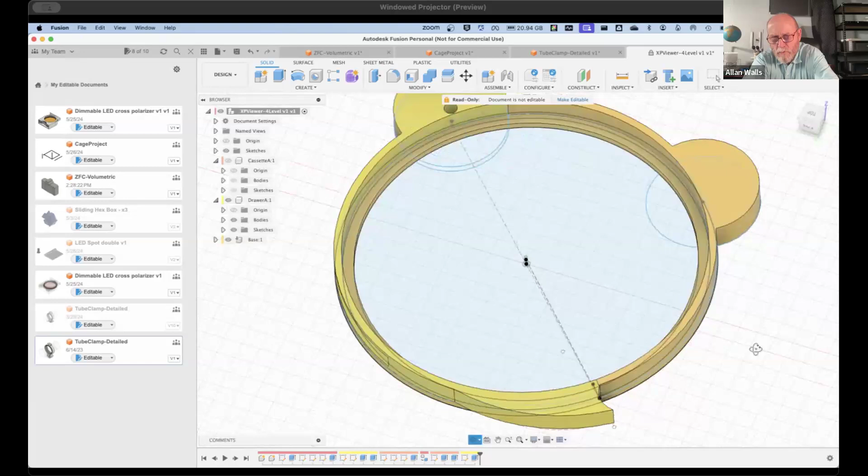And if I put a metal pin through that hole, it would probably work as is if I just printed the parts.

Yeah, and there is, when do you do that? When do you just say the hell with getting this drawing right and just print the parts and put them together? Never.

No, I mean, yeah, just like everything, the real mastery comes in knowing when to stop, right? That's true with photo editing, right? It's true with this. It's true with sand and wood. If you don't know when to stop, you won't have any wood left.

Yeah, the only thing that concerns me is that looks pretty dang skinny. It does, thin wall there. Huh? That thin wall, yeah. That's very... but it's not weight bearing.

It's just going to, the drawer swivels out to give you access to drop in a cassette. It's not going to... but as you over travel the opening situation, you're going to be stressing that area. That's going to be highly subject to fracture.

Well, maybe I'll put a bushing in there and a 2mm pin. Well, then the bushing will break through. Well, I can make it off center, can't I? And it'll still open. Yeah.

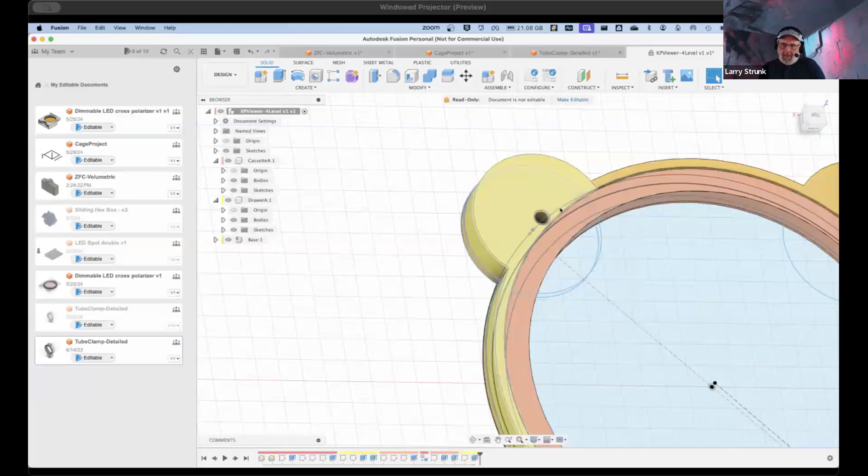You can look at this and go, oh, there's plenty there. And then you measure it and it's like, oh, that's 0.2 of a millimeter. It's easy to get to about 0.2 of a millimeter, because originally it was all the way through that thing. I made it as small as I thought I could get away with, because that's only 2.5 millimeters.

3.5 millimeters across. Yeah, that's way too thin. What's the wall thickness there? The minimum wall thickness is 0.25 millimeters - that's 10 thousandths, thinner than you can print. So I'll have to move it.

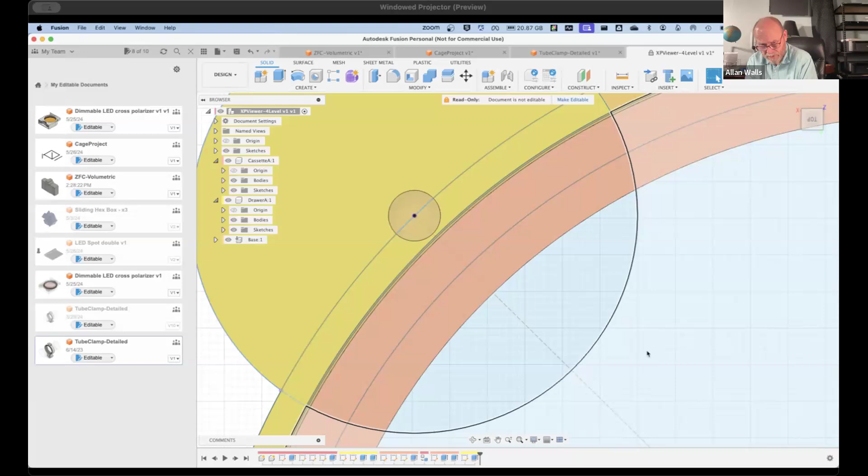But that's a mistake I still occasionally make. It's really easy to lose track - you're looking at that thing and it doesn't look like 0.2 of a millimeter. It always looked iffy to me, and I figured you were going to say something about it because it does look so thin. But honestly, I don't have enough spatial orientation to tell how far I could move that hole away from the center of that circle and still have it function.

See, when I move the hole towards the outside, what's going to happen is that it's no longer going to turn like a circle. It's going to be a cam, and it's going to raise up one edge of that thing when it's standing on its side.

No, it'll work. Increase the wall thickness around the pinhole and just cut out the sliding member. There should be a little divot there. It should work with an off-centered hole.

Well, as it's off-centered, the perimeter, the circumference, is going to change in relation to its distance from the center of the actual diagram. Yeah, but it's going to be opening. Right, but it'll raise up one side of the base of the device.

If it's turning around the center, then when it turns, it'll be flat. But if you move it horizontal to the outside, it's going to be like a cam - if that hole moves away from the center of the whole device.

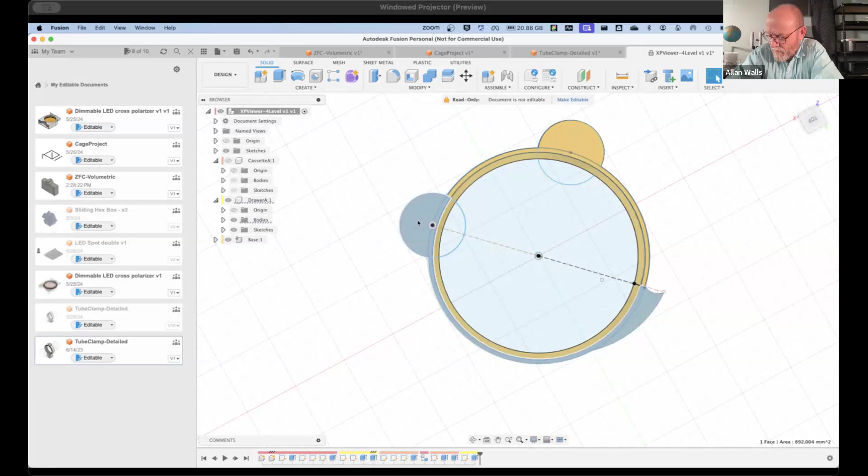Yeah, just put a hole here and redraw the circle. But that won't work, will it? No - if you put the center of rotation further out, as Allan says, you're going to get a cam effect, and the ring is going to foul the outside of the holder.

'Cause surely it's not concentric. It'll catch on the corner. Catch on the corner of what? The chassis. The chassis isn't going to move at that edge.

I could carve a piece of that out to give it relief. Or you can move the pivot point farther down in this orientation, and that'll give you the clearance to get around when you're closing.

When you say down - if you move the pivot pin a little bit to the left and a little bit down, it'll accomplish both things. Okay, so a bit there and a bit down. I'll experiment with it now as I know how to make the joint.

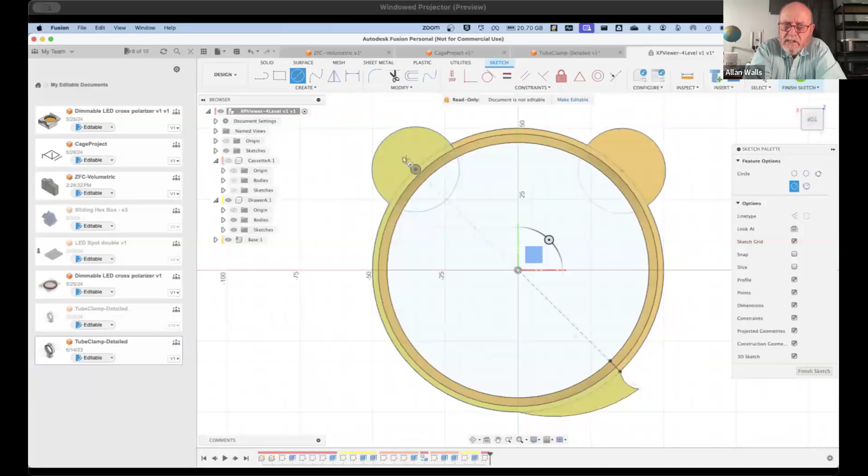But I'm not really thinking this out - I'm just putting that there to get a place to start. As it's rotating, it's going to clip that corner. Oh, here, yeah, right.

No, the corner - if you draw a line directly between the two pinholes that you have drawn, it goes all the way to the inside. Follow that line - it'll clip right there. That's where it's going to catch.

You could radius that out, or you could just move the new pivot hole farther down and over to the left a little bit to clear that when closing.

Will 360 show me the motion and show me where it's potentially being blocked, or will it just turn right through it? It'll turn right through it. You can turn that on, but you should be able to see it, which is usually enough.

The design is so that it can be used lying on its back like this, or it could be used standing up on its edge with those two cylinders as its supports. The reason I liked it was the support on the side with the joint can be used as a joint without changing the anatomy of the support. You can open that drawer and it still remains a cylinder of the same shape, so you can support the device on it.

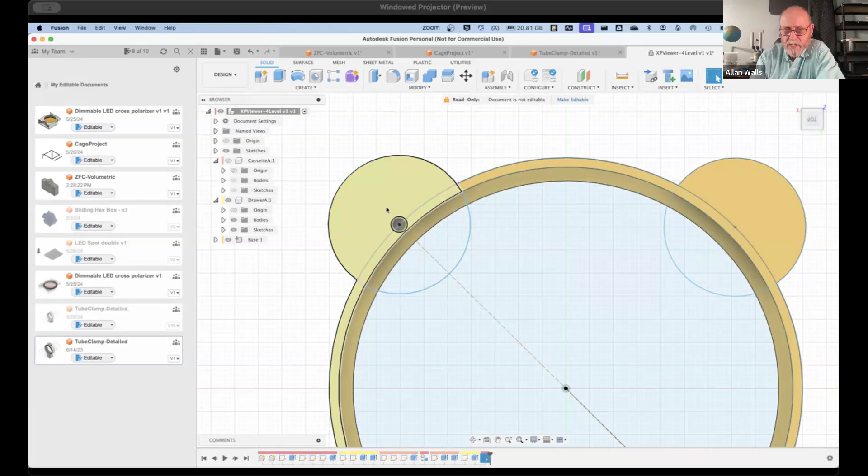It's because there are 4 of these and they're sandwiched with bits that don't move from the chassis. So you've got 4 of these joints inside a cylinder of the chassis, so they can all turn at once or one at a time to load the cassettes without taking away the supports they're standing on. I'm just going to have to show you this when I've got it finished, because it's pretty clear in my head that it'll work like that until it busts through that thin wall.

I think maybe the best thing to do would be to just increase the wall thickness right there. That I can do.

The other question I'd have is if you have all the drawers pulled out fully open, what does that do to your center of gravity? Is that still going to be sitting stable? Not really, but I'm thinking of drilling out the cylinder on the right and putting a metal bar in there to just give it some weight at its base. That would address it, kind of to counterbalance the hinge pin, which is going to be another piece of metal holding it.

Because if you open all those 4 drawers? Yeah, there'd only be probably at any given time one of them open at a time. You'd open them to place a specimen or to change a piece of filter.

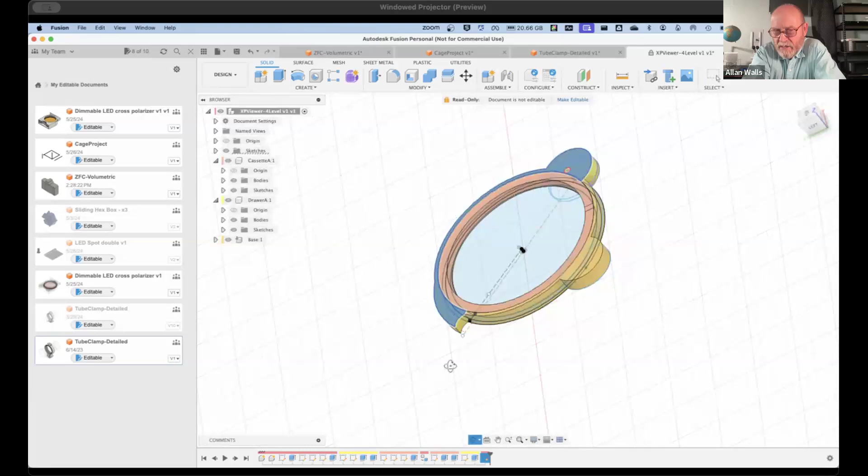You're also adding mass weight to them inside those drawers. That's adding a lot. Very little though, very little weight. The cassette I haven't finished yet is actually a sandwich of two pieces that slot together over little pins and they click into place. I've made them already and they work great, but they don't add much weight to it.

Yeah, it's going to be PLA, right? Yeah, PLA plus. But you're adding glass on top of that, aren't you? No, no glass in it. Oh, correction, okay, I misunderstood. There will be a glass slide, a microscope slide that will span the second of the drawers. That'll be your specimen piece.

Gosh, I've got all this drawn out in the other drawings that I redid because of this hinge thing.

It's just very hard whenever you're doing any design to figure out all the places it can possibly fail. Sure, no, I definitely, figuring out failure analysis is probably the most difficult thing of design, in my opinion. Yeah, it is for sure.

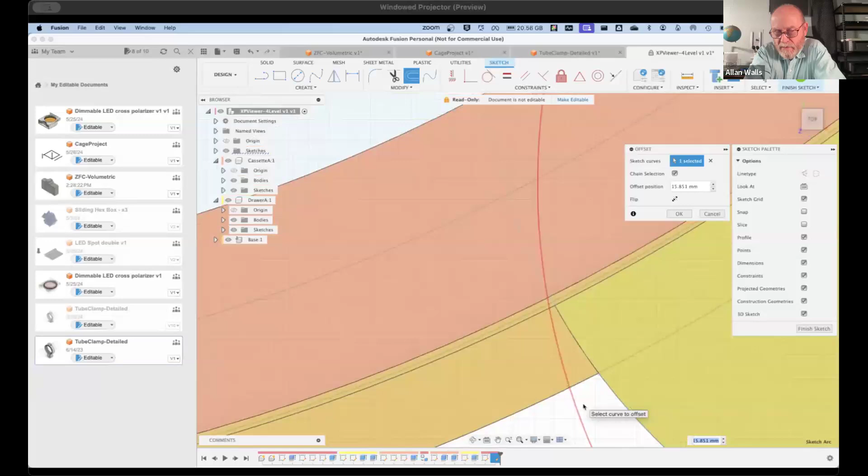Yeah, I'm liking this. You've kept it concentric and you've just shifted it in relation to the... that should work perfectly. Then just cut clearance there. And the other thing I want to do is move the floor of the chassis onto the floor of the drawer, so there's something to support the cassette when I open it.

But that's trivial. I'm still not happy, chaps. I'm so sorry. No, it's fine.

I think that as you open it, because of the eccentricity, the rotating ring will foul the outside of the drawer. If you have a pivot outside, the further away you get from that ring, the more eccentric the movement will be, in relation to the ring. Yes, it will foul the outside on the opposite edge.

But I can cut relief for that. You could radius that out to give you the clearance. It just won't be as pretty looking.

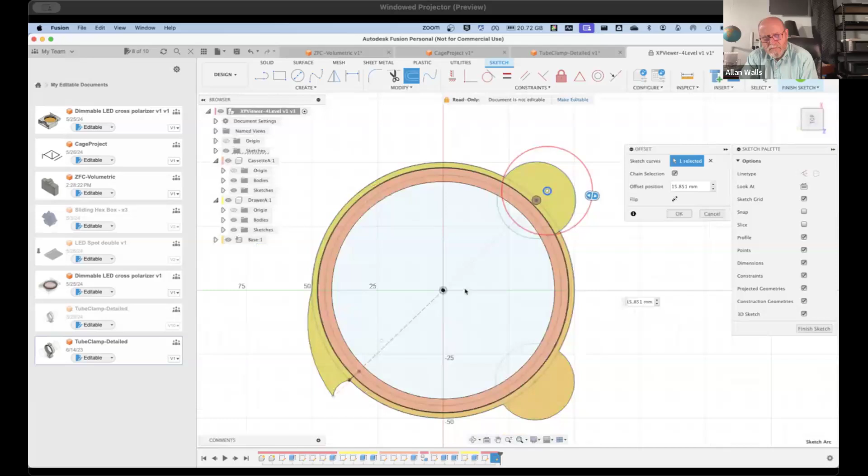Yeah, it's still got to rotate, so just be careful. The further you go out, the worse, the more clearance you're going to need, and it will be quite large, that clearance. And it'll look ugly too. I think I would go back and make the cut, move it.

Offset that cut. Yeah, because now it's going to swing out. Allan, I know everyone's going to hate me for saying this, but this is a cardboard and a pin job to evaluate what you want. I already did that on this initial drawing, where the only thing it didn't take into account was the thinness of that wall. I had already cardboarded this out, cut it, pinned it, and checked all the clearances, and it worked great, except I didn't take into account how thin that wall was - it was going to kill me.

The traditional 3D printing approach to this is just to make that whole wall of the cassette thicker, expand it to the outside, double it even. I was just trying to keep the proportions so that it looked like an old-timey alarm clock, but there's no particular reason for it. I just got attached to it.

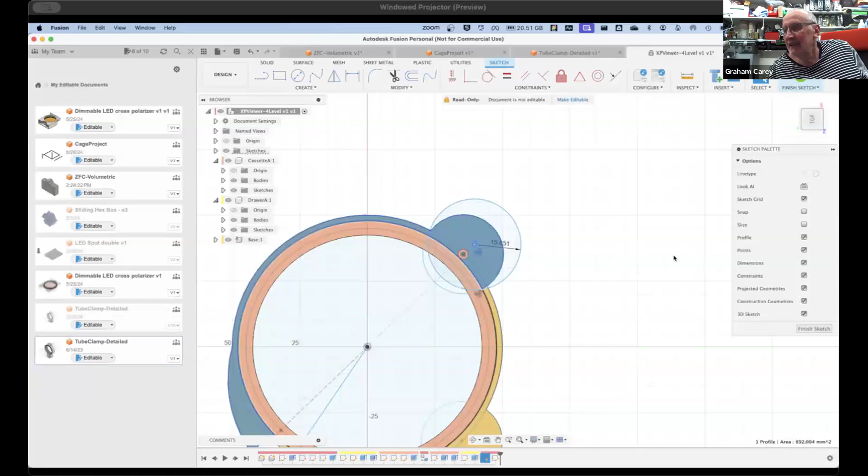Guys, I'm going to have to go - we've just been listening for 4.5 hours, so this was brilliant, Larry. I'm glad you let me come over here and look at this, because I've learned a lot about what not to do here. This can be so cool when it's finished. You're going to love it, and it's going to work. I hope you have better success with finishing projects than I do. Oh, I certainly haven't so far.

I still don't know how you did that magic thing of moving the cassette over - I'll have to practice that. I'll fix it and send it. Well, you offered last time, and I said no, I'll do it. And here we are a month later, and I still haven't got it working, so maybe I'll take you up on that.

All right, any ideas on homework? Make one of these and make it work. Submit them to me, though, and I'll break them. Or what do you think for a topic? Something with a joint, something with an as-built joint. It doesn't matter what it is, just make the joint and show how it works.

Just an idea, Larry - how about you creating something as a test and us fixing it? No dear, something simple for me. Right, no, I understand what you're saying - that's a good idea, I love it, except for the fact that I have to do something. Yeah, that wasn't in the assignment, Larry - you do the work, that wasn't in the contract.